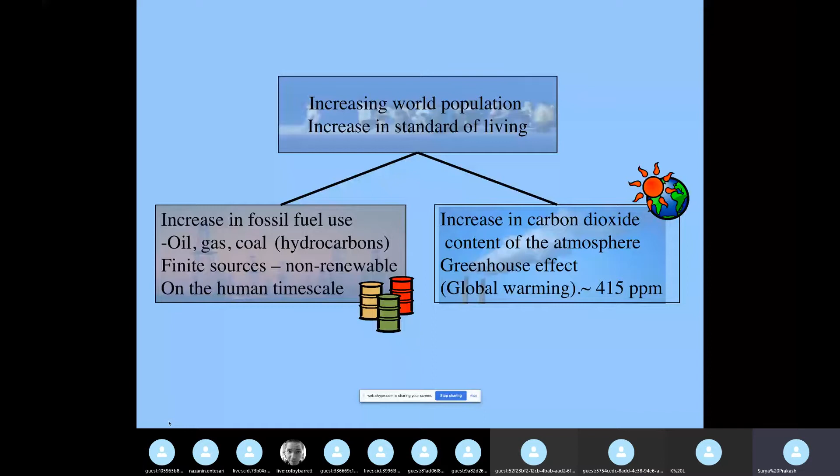Now, if you go back in world history, in the 17th century, the world population was around 545 million, but it kept on increasing. In 2000, we surpassed 6.2 billion. And in 2011, we surpassed 7 billion. By 2050, the projection is the population of the world will be, if you talk to an optimist, maybe 8 to 9 billion. A pessimist will say 11 billion.

Are you still able to hear me?

Yes. Okay, good. One of the things that the populations of the world are doing is using energy to do all kinds of stuff.

So if you compute all the energy used by humankind at any one time—transportation, your TV on, computer on, power plants running, homes heated, air conditioned—we are currently using 180 petawatt hours, or 18 terawatts continuously. That is equivalent to 18,000 power plants operating at 1 gigawatt. This is the kind of energy humankind is using continuously.

If you compute all the energy being used all over the world, this is supposed to go up by 21 terawatts by 2025, and 30 terawatts by 2050.

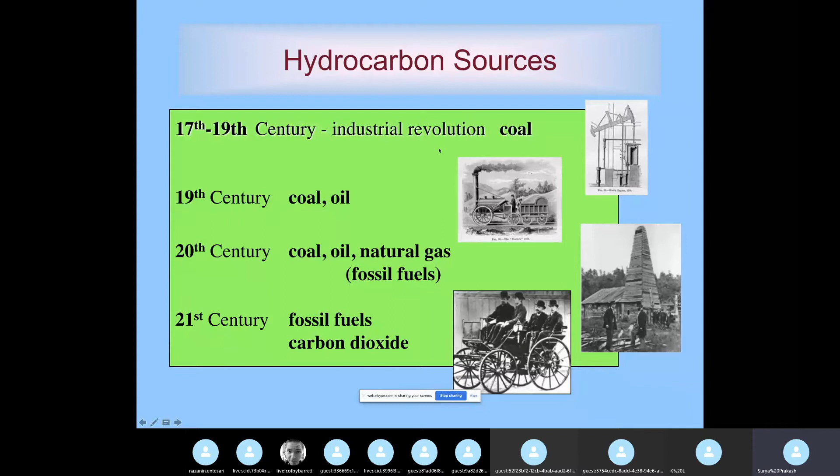Carbon dioxide is a molecule which contains carbon, and as a chemist, we can play with this molecule. In fact, this is a very important molecule in the survival of mankind as we know it, as you will see in my lecture.

Now, petroleum oil and other fossil fuels are used not only for transportation—to make gasoline, diesel, and things like that—but also to make so-called petrochemical products, chemical feedstocks. For example, you make plastics, agrochemicals, and fertilizers. All these things are done through petroleum oil, about 8 to 9% of it is used to make these other products. This is very important for us—without it, I think modern humans cannot survive.

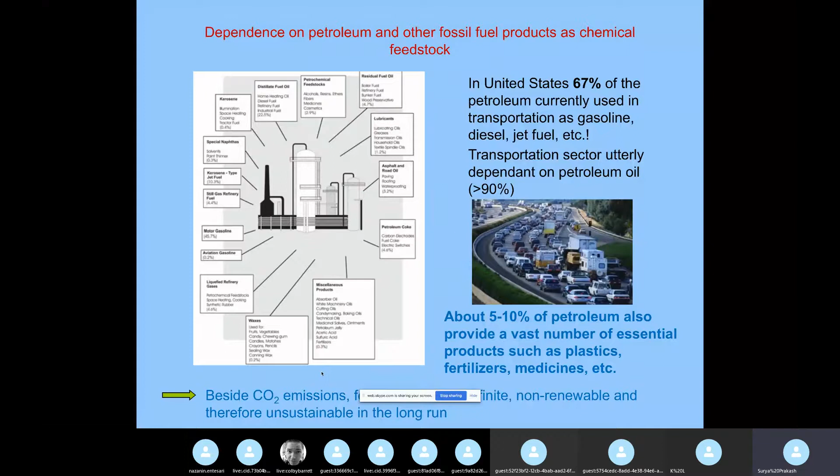So besides CO2 emissions, fossil fuels gave us unprecedented prosperity for humankind—that's what I would like to emphasize. Now, what has happened is that by burning all these fossil fuels over the years, every year we are using more and more of them, creating more and more human-caused CO2 emissions.

People have computed this using computer models. In 2013, we released about 35 billion tons of excess carbon dioxide into the atmosphere—this is all anthropogenic, human-caused CO2 emissions. By 2017, it was around 40 billion tons. So it's increasing, and about half of the CO2 emissions accumulate in the atmosphere.

And CO2 in the atmosphere—what it does is, can you hear me? Hello? Yes, okay good, yes Professor Prakash.

The CO2 in the atmosphere can absorb certain wavelengths of the sun's radiation, and then the heat is radiated back to Earth. So it causes global warming, and global warming has increased glacier ice melting, sea level rising, and climate change.

I think, let me hide this. Yeah, oh, what happened here? You can still see me, right?

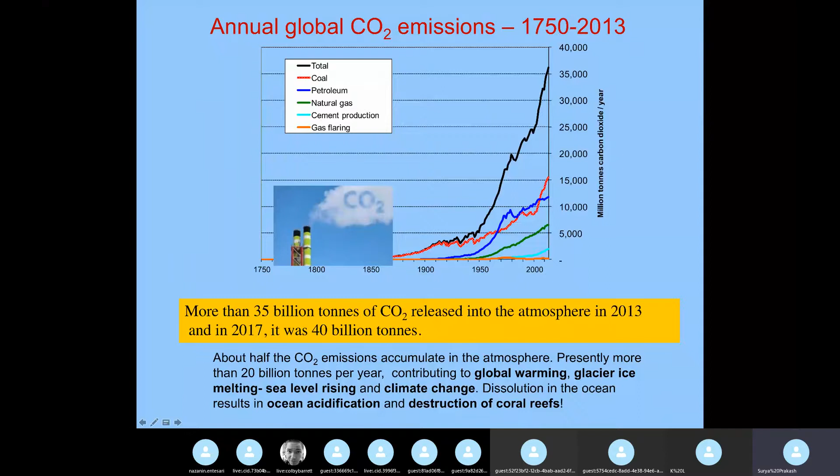Now the carbon dioxide conundrum, as I call it in the slide, has also resulted in global temperature change. You can see many things here. For example, the blue line is the temperature changes, and this solid line is the CO2 concentration,

which is measured on the Hawaiian island Mauna Loa, close to that volcano. CO2 concentration is also given here. You can see how the CO2 level is rising, and global average temperature has gone from 1.2 to 1.5 degrees.

It's a pretty big change from the pre-industrial age. Currently, in August, this is measured on a daily basis. You can see this on Google.

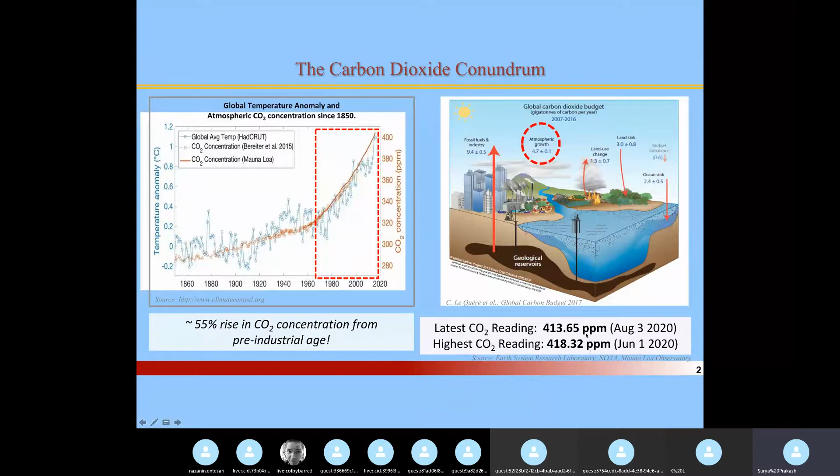August 3rd, the reading was 413 ppm. In June, it was 418. It hovers around 415 parts per million, and it is slowly creeping up.

Now, there are a lot of other greenhouse gas emissions happening. Carbon dioxide is the major culprit, about 76% contribution to global warming. Methane, which is natural gas, is 23 times more global warming than carbon dioxide.

Methane emissions come not only from agriculture and animals, but also methane leakage and so on, about 16%. Nitrogen oxides, which come out of automobile emissions and heat engine emissions, are about 6%.

These are also pretty bad. Fluorinated gases, which are used as refrigerants, are also highly greenhouse warming. But if you look at it, CO2 is our major problem.

Electricity and heat production is 25%. This is how buildings, for example heating and cooling of the building, also contribute.

And we humans, as individuals, also emit CO2. In fact, we exhale CO2. Whatever carbon-based food we eat is eventually converted at a cellular level into CO2.

And CO2 comes out, and you exhale it. An average human being, an American I could say, over a 24-hour period exhales almost 1 kilogram of CO2. This is something to ponder for you guys.

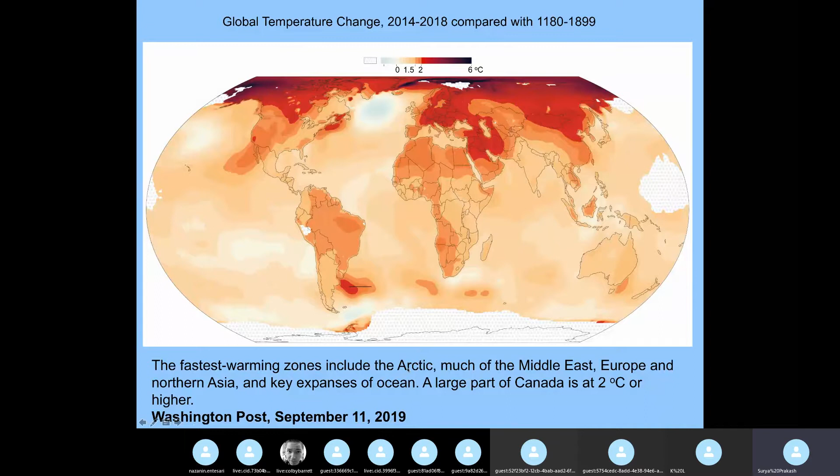Now, what is the solution for this global warming? Engineers and scientists said, okay, if CO2 is produced at a point source, for example a coal burning power plant, the flue gases will have 10 to 12% CO2 in it,

why don't we separate the CO2, capture it, and put it underground in depleted oil fields, deep aquifers, deep oceans, depleted natural gas fields, and things like that. But this is a very expensive proposition.

First of all, you need to separate it using a sequestration facility. Then you have to inject it through various technologies. So this is a very expensive proposition, and carbon capture sequestration is a pretty difficult process to achieve economically.

So what is the alternative? Now, carbon dioxide, as a chemist, is carbon and 2 oxygen. It's a symmetrical molecule, it has no dipole. But CO2 is a feedstock, you can do many things with it. For example, CO2 can be converted to polymers like polycarbonates and polyurethanes.

CO2 is already converted with ammonia to make urea. It's a major fertilizer; without urea there wouldn't be food production in the world. So CO2 contributes—CO2 with ammonia makes urea.

150 to 200 million tons are made. It's used in the food industry—you make carbonated beverages, Coca-Cola and Sprite and things like that.

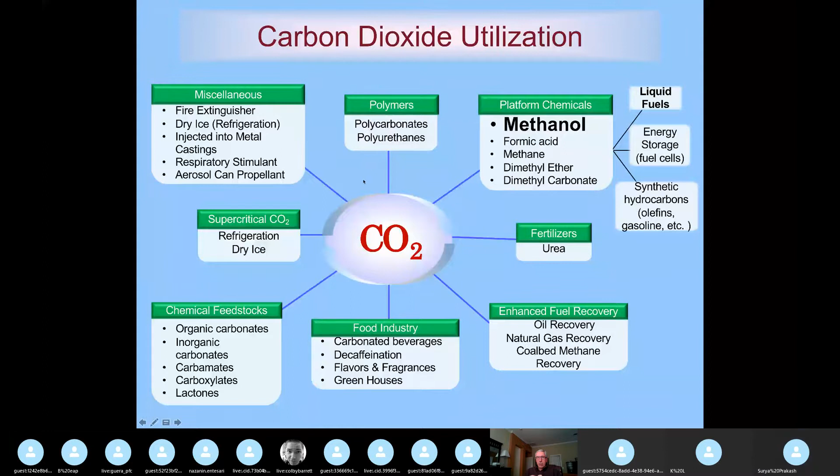Now, just to give you some numbers, ladies and gentlemen, if you look at the daily usage of fossil fuels, the world is currently using close to 100 million barrels of oil a day. A barrel is 42 gallons or 160 liters. And 10 billion cubic meters of natural gas, this is going up every year. And 16 million tons of coal was burnt about 2 years ago, it's a little bit decreasing right now. So all this activity is resulting in CO2 release, and the greenhouse effect is becoming severe.

Now, we all talked about biofuels. For example, nature uses carbon dioxide through photosynthesis to make all the flora and fauna, forests, and things like that. And if you use forest products or agricultural products like sugar or corn, you can make ethanol, which is a 2-carbon alcohol. The US converts 40% of its corn crop to make 13.9 billion gallons of ethanol a year.

That's equivalent to 330 million barrels from corn, equivalent to 225 million barrels of oil. That's mostly 2.5 days supply for the world. So 40% of American corn making ethanol is not a solution. In fact, there are people starving in the world. Corn is a food. So food security is more important to mankind than energy security.

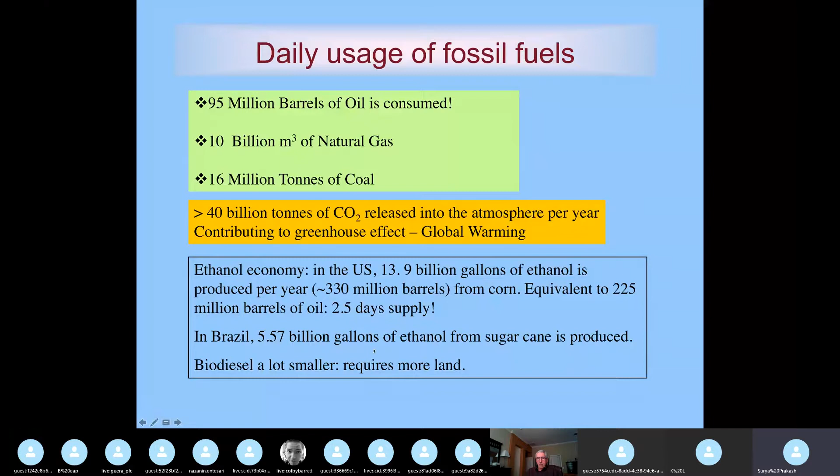Brazil converts its very dear sugar crop, sugar cane, into ethanol too. So these are all very small. It's not going to supplant fossil fuels. It can only supplement alternatives to fossil fuels.

Now biomass, nature does a wonderful job. It takes carbon dioxide and water with a green dye called chlorophyll. With sunlight, it is converted to sugar, celluloses, and things like that, very nicely. This is called photosynthesis, and you can make biofuels like ethanol, butanol, vegetable oils.

But this can only be a small percent of the energy mix, because to practice photosynthesis, we need to worry about land mass, land availability, and use. We need a lot of water to grow crops. Irrigation becomes an issue. Then we need to feed a growing population. How can you divert food into energy materials? It's not a good idea either.

And of course, to grow food crops you need fertilizers. And fertilizers come from ammonia, which is made from fossil fuels. This hydrogen comes from methane reforming and things like that. I'll come back to this in a minute. So processing technologies, energy use, overall energy balance, life cycle analysis—you need to worry about all that when working with biofuels.

And also the efficiency of photosynthesis is pretty bad. To convert water, sunlight, and carbon dioxide in a rice plant, which takes probably 4 or 5 months to grow, the overall efficiency is less than 1%. So nature is very specific, but nature is not very efficient.

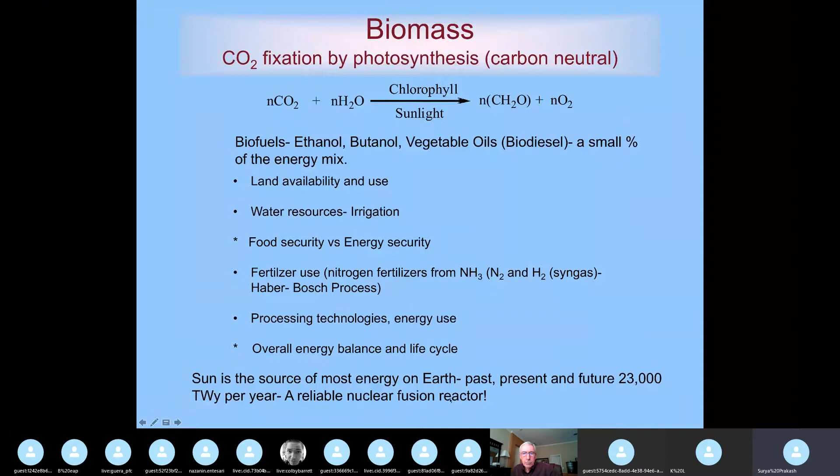But we don't have to worry about this, because the sun is the source of most energy on earth, past, present, and future. It is putting out 23,000 terawatt-years per year of energy, a reliable nuclear fusion reactor, which comes up every morning and goes down every evening, on every corner of the earth. So the solar flux is amazing. The estimate is 23,000 terawatt-years.

And mankind in 2009 used only 16 terawatt-years; now it may be 18. Look at all the other alternatives. Tides generate power too, because of gravity, about 0.3 terawatt-years per year. Geothermal is this much, hydro this much. Biomass is not that much at all, only 2 to 6 terawatt-years. And other types of technology are not very much either. But look at renewables—wind is 70 to 120.

And if you look at fossil fuels, which are finite, natural gas is 215. Sun is 23,000 per year. Okay, so it's coming every year, next 4.5 billion years. Petroleum is only 240. Uranium, which is for the nuclear energy, is 90 to 300. Coal is 900, but coal is very dirty. People are trying to get away from that.

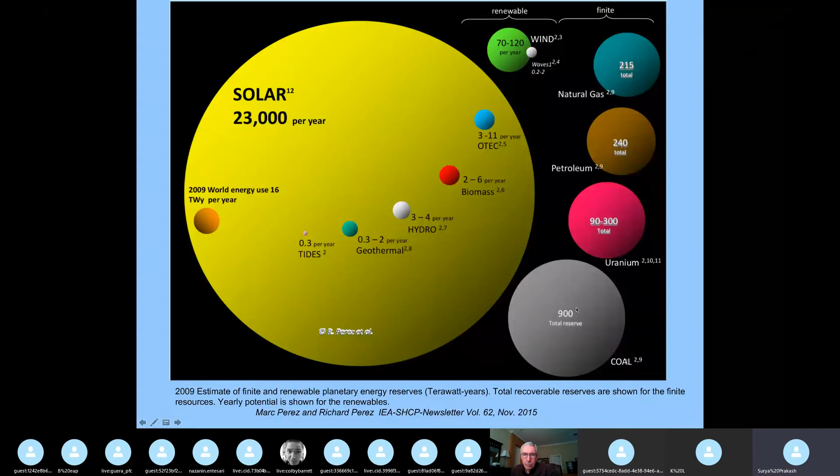So if you understand this, Earth does not have an energy problem, ladies and gentlemen. It has an energy storage and energy carrier problem. Okay. So what are the issues? Why do we have all these problems? Why not use more alternative energies and resources like hydropower, geothermal energy, wind energy, solar energy, biomass, ocean energy, or even nuclear energy, if you have the stomach for it?

The problem with all these alternative energies, mainly, is cost, although the alternative energy costs are coming down. Fossil fuels are still the biggest bargain nature ever gave us, because you just dig a hole and you can get it. In Saudi Arabia, you make a hole and you can extract oil for just a few dollars a barrel. The most promising solar and wind energies are intermittent and fluctuating. They produce mostly electricity, and battery technology has not advanced.

Whatever Elon Musk says, we still have a problem with battery technology, because to make a battery, you emit a lot of carbon dioxide. So if you look at the life cycle of making a battery and running a battery, it's not that clean if you think about it.

Okay. Now, people talked about the so-called hydrogen economy. Hydrogen is light, one of the first elements of the periodic table, right? It burns cleanly. It makes water when it combines with oxygen. But it's not a primary energy carrier on Earth because it boils very low, minus 253 degrees Celsius. It's tied up in water and fossil fuels. It has to be liberated. You need energy for that. It's incompatible with 20% oxygen in the air. It's a love affair. It can explode under certain ratios.

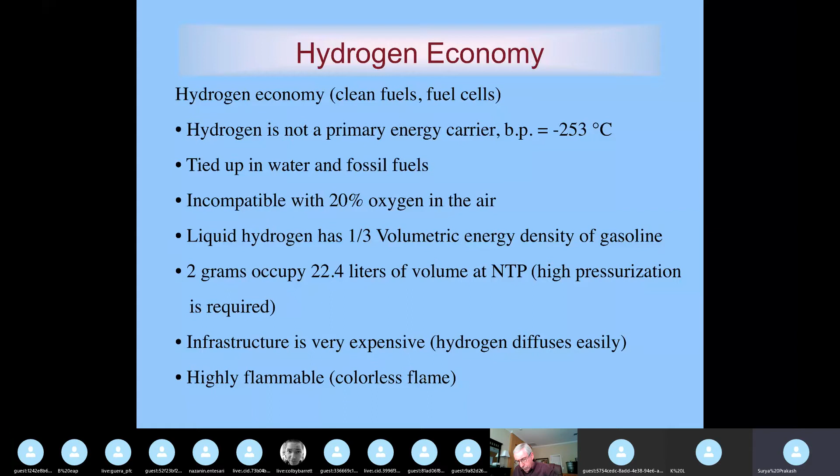Infrastructure is very expensive. It diffuses. It's a very tiny molecule. It can go through. If you have a hydrogen balloon, after some time, it's all diffused through the plastic, right? You see that. Same thing happens with helium too. It's highly flammable with a colorless flame. So hydrogen economy, although hydrogen is there everywhere, especially in the outer planets and outer space, it is not a compatible or handleable fuel for us humans, mortals on Earth. So what is the solution?

So about 25 years ago, Professor Olah and I at the Loker Hydrocarbon Institute came up with a concept called the methanol economy. So I'll tell you briefly what methanol economy is. This was done with my mentor and colleague, Professor George Olah. He passed away in 2017. In 1994, he obtained the Nobel Prize in Chemistry for superacid chemistry, to which I contributed. In fact, I accompanied him to Stockholm to receive the prize. And he's one of the major proponents of the so-called methanol economy concept.

What is methanol economy? Methanol is a simple molecule. It's a liquid alcohol, boils around 65 degrees Celsius. It was discovered by Dumas and Péligot in France. They isolated it from wood by heating wood chips. This methanol vapor comes out. It's called wood spirit or wood alcohol. And the beauty about methanol is it's a fantastic fuel for internal combustion engines. It's a high octane fuel, clean burning. It has 15.8 megajoules per liter of energy. It can be combined with 15% gasoline, and M85, 85% methanol, 15% gasoline, is a fantastic fuel for all IC engines.

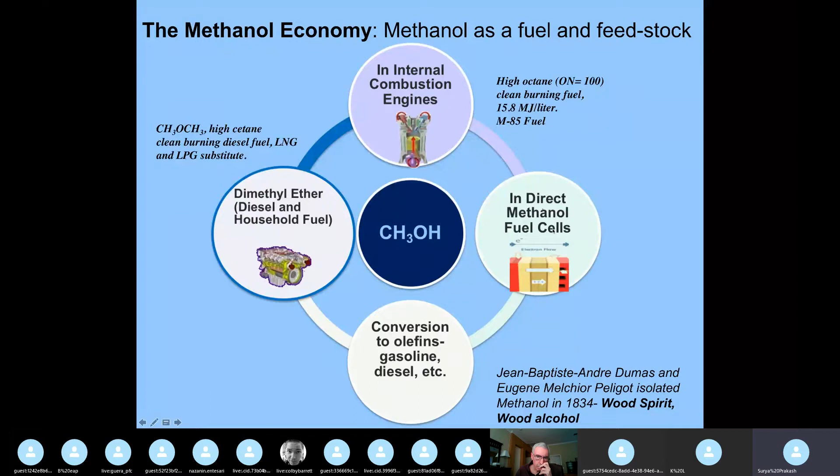Methanol can be converted to a compound called dimethyl ether. It's high cetane. That means it can replace all diesel fuels, and it's a gas replacing LNG and LPG. I'll come back to this in a minute. Methanol can also be converted to petrochemical products like olefins, gasoline, kerosene, aviation fuel, diesel, etc. And methanol could also be used to produce hydrogen on demand. It's a much higher volumetric energy density fluid than liquid hydrogen. And it can also be used in the direct methanol fuel cell that was developed in our laboratories in the 90s in collaboration with NASA JPL. So I already said it's a wood alcohol, it's a liquid, an excellent internal combustion engine and turbine fuel, high octane number.

Since 1950, it was used in race cars. And also methanol can be mixed with some gasoline. It's used in flex fuel vehicles similar to E85, which is used in California, for example, and other places in America. So methanol can easily substitute ethanol, which is derived from corn. It has half the volumetric energy content of gasoline, but is more efficient and cleaner burning. In equivalence, 15 gallons of methanol is equivalent to 10 gallons of gasoline in terms of power.

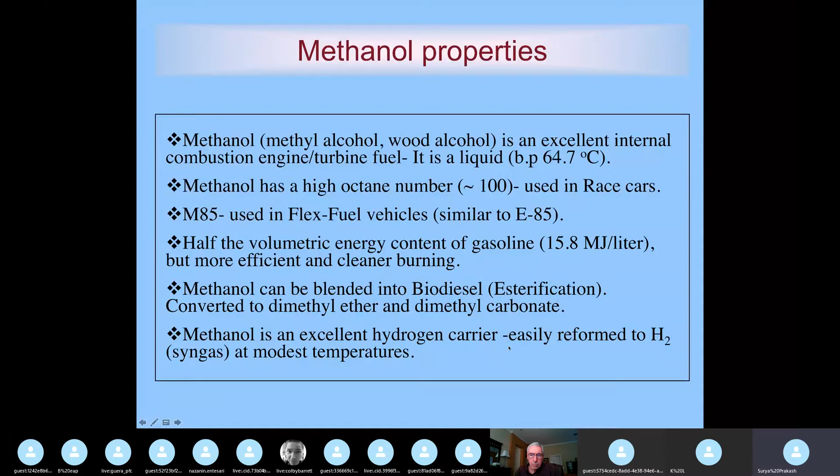Methanol can be blended into biodiesel. It's already done. Esterification, converted to dimethyl ether and dimethyl carbonate, which are also fuels in their own right. Methanol is an excellent hydrogen carrier because it is easily reformed to hydrogen at modest temperatures. Methanol is miscible in water, just corrosive for aluminum, zinc, and magnesium. But modern vehicles are compatible with methanol.

Almost all vehicles made since 1992 in America and the rest of the world are already flex fuel vehicles, so it's not a problem to have alcohol in the engine block. Only certain gaskets have to be changed. Methanol has low vapor pressure at low temperature, so you need to spike it with some gasoline. That's why they use 5% to almost 85%.

Ingestion: you can't drink methanol like ethanol. Ethanol we all enjoy sometimes, beer, wine, and things like that. But methanol can be poisonous. It can blind you. Ingestion can be lethal. But gasoline or diesel are equally toxic. How many times do you go to a gas station and ask for a pint of gasoline or diesel to drink? You shouldn't do that.

Having said that, methanol is found in beer. Methanol is found in orange juice in small amounts. Aspartame, the sugar substitute, when it reacts with stomach acid, makes quite a bit of methanol. Small amounts of methanol are not toxic, but anything above 20 milliliters can be a problem. So you have to be careful. Spillage is very safe to the environment. It's a plant growth promoter. It's already used in wastewater treatment plants for denitrification of water. It's a reducing agent for nitrates in water.

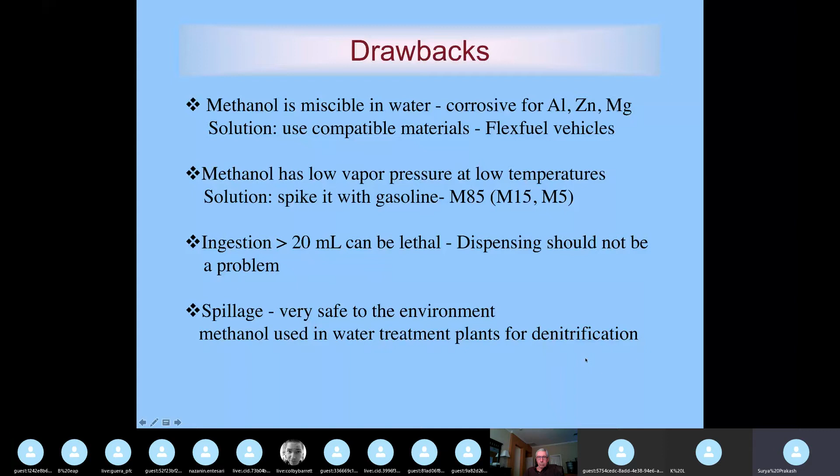So methanol in internal combustion engines has an octane number of 100. So the air fuel mixture can be compressed to a smaller volume, resulting in a higher compression ratio. I know there are some aerospace engineers, they understand this very well. Methanol also has higher flame speed, which gives you higher efficiency. And more importantly, methanol has high latent heat of vaporization. It's 3.7 times higher than gasoline. So it absorbs heat better and removes heat from the engines.

It can be blended with gasoline in various ratios. It can also be blended as methanol, ethanol, and gasoline, called GEM fuels. And Lotus, the race car company, has demonstrated that. And since methanol has high latent heat of vaporization, methanol burns cleaner. Very little NOx is produced with methanol engines. NOx is also a greenhouse warming toxic gas. Since methanol is a one carbon alcohol, you don't get any 2.5 micron particulate matter. One of the biggest pollutants from automobile emissions is NOx and particulate matter.

So no particulate matter. And also methanol is safer than gasoline in fires because you can extinguish methanol fires with water. With gasoline fires, you need foam. Methanol can be dispensed like a liquid, so we already have the infrastructure to dispense it. It's compatible with hybrid fuel electric systems. And China is one of the biggest adopters of the methanol economy. In fact, many taxis in China run on methanol, buses run on methanol, and there are dispensing stations in China.

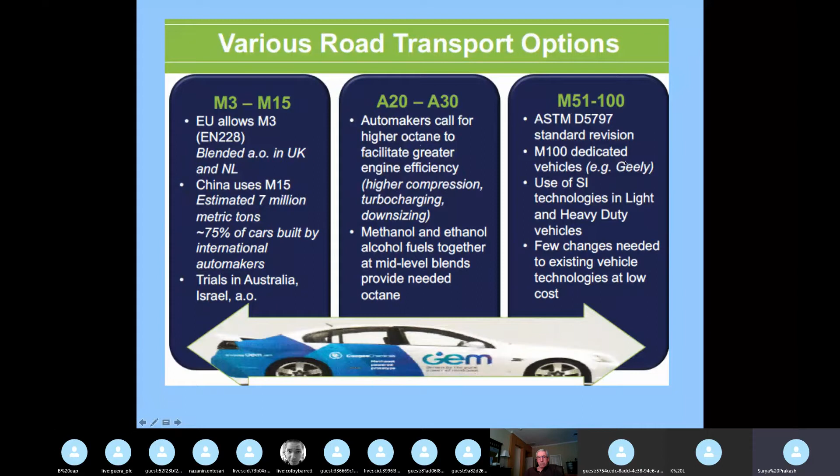There are various road transport options. For example, M3 to M15, 3% to 15% methanol blends, is done in the UK, China, Australia. 20 to 30% was done initially in China with different alcohols to boost the octane rating. But 51 to 100% is done mostly in China. China is big in this. And there's a car company called Geely, the owners of Volvo. They have shown that in China currently about 180,000 vehicles, this is old data, are running on 100% methanol, mostly taxis.

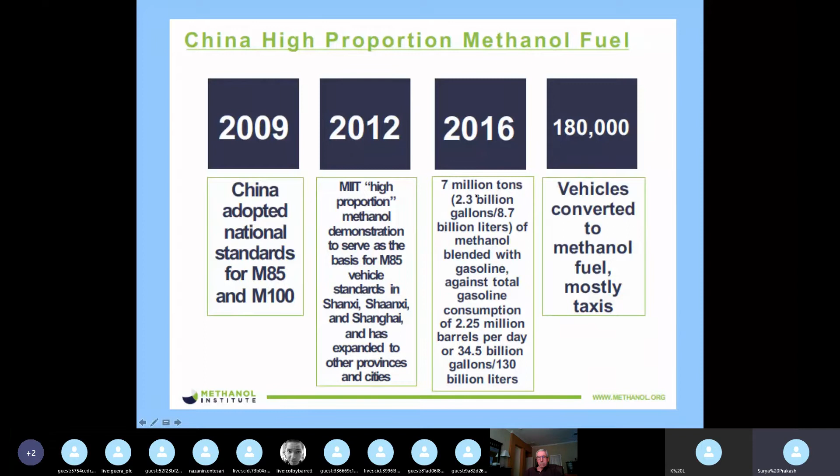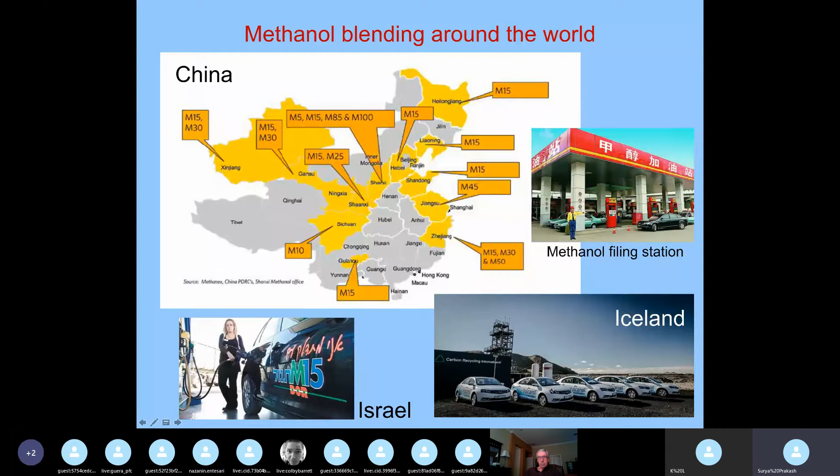In 2016, 7 million tons of methanol was used, either as such or blended with gasoline. These are the provinces in China where methanol is being used, Shanxi, where there is a lot of coal, they make methanol. Even M100 vehicles are running. I know Shanghai also has a lot of M100 vehicles. Israel has adopted some aspects of the methanol economy because they found natural gas; they can make methanol out of natural gas. Iceland makes renewable methanol. I'll come back to this a little bit later. Now, this is a Volvo-like car in China, Geely, which is a 100% methanol car.

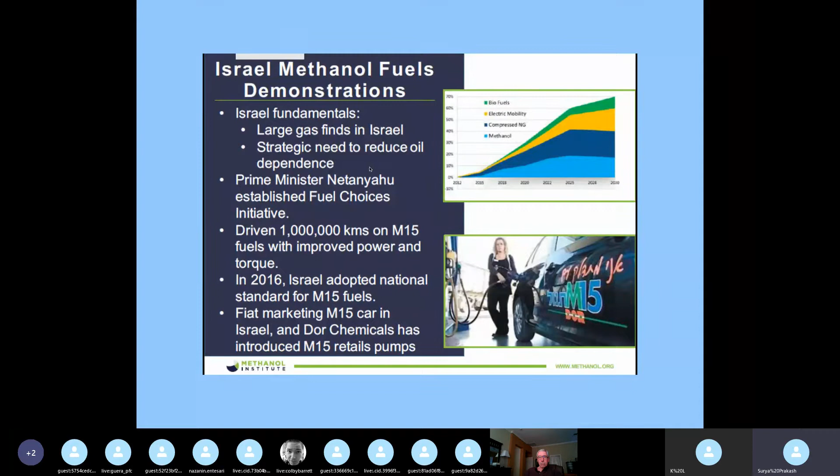Okay, and Israel has done a lot of demonstrations in this area. I was in Israel when I got my prize. It's very interesting that they have a small country. They don't have any petroleum oil, but they found some natural gas in the Mediterranean. So they're converting some of this methane into methanol.

India is another country which is interested in adopting methanol economy because they don't have much petroleum oil. They have to import it. And also we have a lot of pollution like China. So substituting gasoline with methanol, our pollution problems will go away quite a bit.

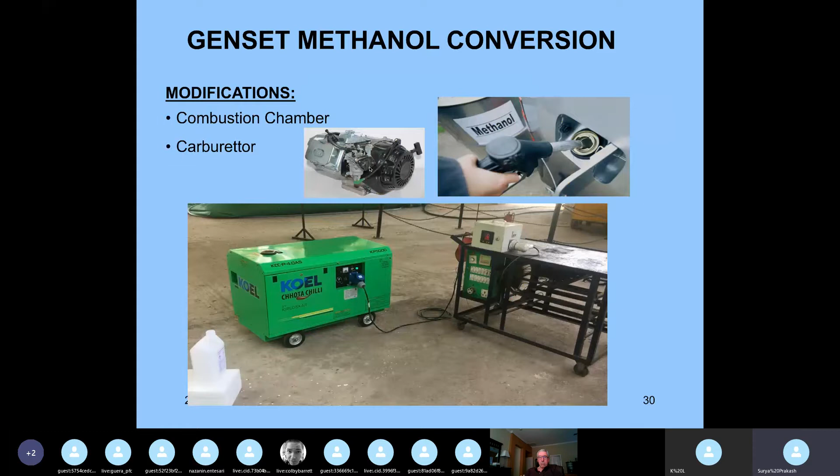And this is a genset; a diesel burning genset can be easily converted to methanol. You just need to change some gaskets. It works beautifully. And also methanol can be used in diesel-like engines. Diesel engines are called compression ignition engines. You take fuel and air mixture, compress it, and there is auto ignition. But with methanol, you need to have a spark ignition. So people have made methanol engines which resemble diesel engines.

And in fact, this super efficient spark ignition methanol engine work has been done at MIT by Daniel Cohn. He has shown that you can increase the efficiency of a diesel engine, which is 30%, all the way to 55% using methanol. Okay, so it's a very big game changer.

And in China, I know this gentleman called Chunde Yao. He has taken a conventional diesel truck. It has a diesel tank, then you put a methanol tank. You start your engine on a diesel cycle, the auto ignition cycle. Once the cycle is running, you start injecting methanol. Then automatically you can get this combustion going, so your emissions and everything improves. With a $1,000 retrofit for a diesel truck, you can make a methanol truck.

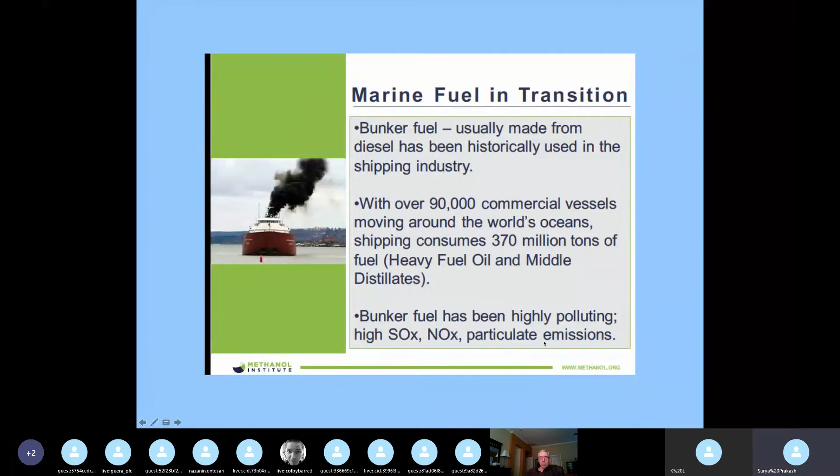Marine fuels: there are 370 million tons of fuel, heavy fuel oil and middle distillates, used, and they are very polluting. Ships use the worst fuel because they are in high seas. Nobody is monitoring them. And they produce a lot of sulfur oxides, NOx, particulate emissions. So this is a big issue. Especially in the Baltic area, there is a lot of shipping activity between the Scandinavian countries and the European countries. And they made a rule recently, called the Emission Control Area, where they monitor all these pollutants.

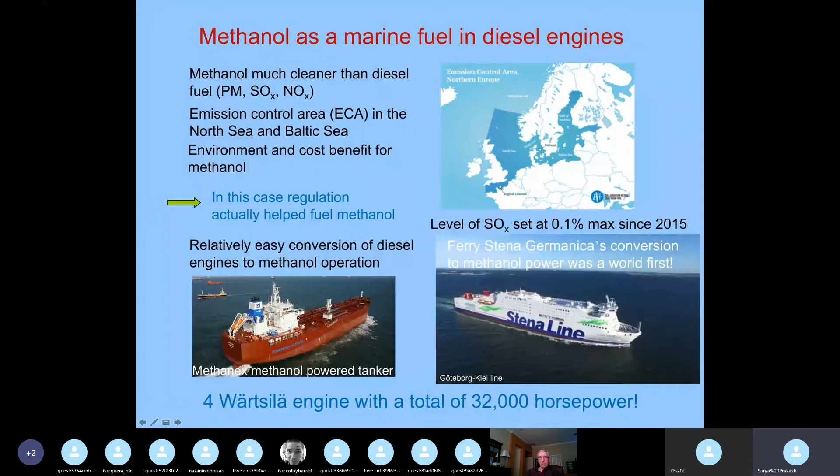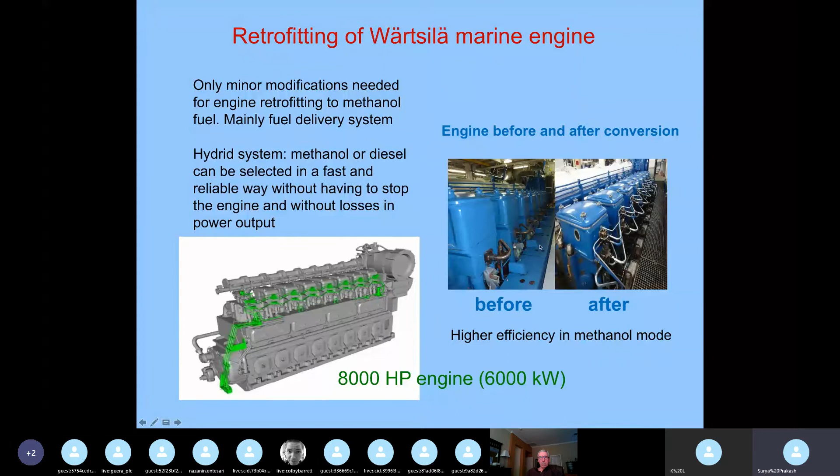So the second largest shipping company in Sweden decided to convert their huge ships to burn methanol instead of diesel. Existing diesel engines were converted to methanol engines by retrofitting. So this can be done. And even Methanex, a big methanol trading company, has some of their ships running on methanol right now. Before and after, they just had to add some injectors and things like that. You can convert them to methanol engines, and they're much cleaner burning than conventional diesel.

Methanol can also be dehydrated to dimethyl ether. It's a gas boiling at minus 24.8 degrees. It's almost like liquefied petroleum gas, like propane. Low melting point. It's an excellent diesel fuel substitute with a cetane number of 55 to 60. Regular diesel is 45 to 55. Very clean burning, extremely low NOx, SOx, and PM. There is no sulfur here, no SOx.

It's already used in spray dispensers. It's non-toxic, safe, and does not form peroxides. It's very interesting. It's a substitute for LNG and LPG. You can cook with it. Easy to produce, ship, and dispense. It also does not form any soot.

Can you hear me? Hello? Yes, Prof. Prakash, we can. Yes, okay, you can hear.

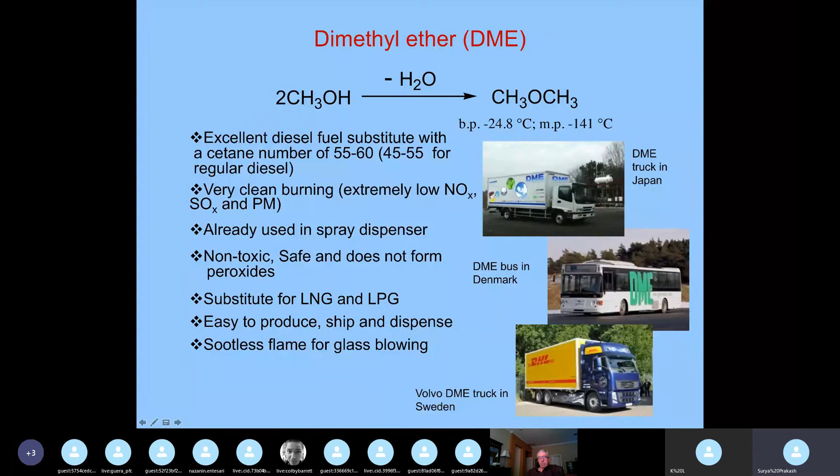Okay. And also it is used in sootless flame for glass blowing. And DME trucks are operating in Japan and Denmark. Volvo is one of the big operators of DME technologies in the world.

Now, methanol could also be used to produce hydrogen to run a hydrogen fuel cell. You all know about fuel cells, the hydrogen-oxygen fuel cell, very clean. It's basically a proton exchange membrane type fuel cell where hydrogen is oxidized at the anode and oxygen is reduced at the cathode. So you produce water, and the chemical energy is directly converted to electrical energy through two redox processes. H2 is oxidized to protons and electrons at a certain potential.

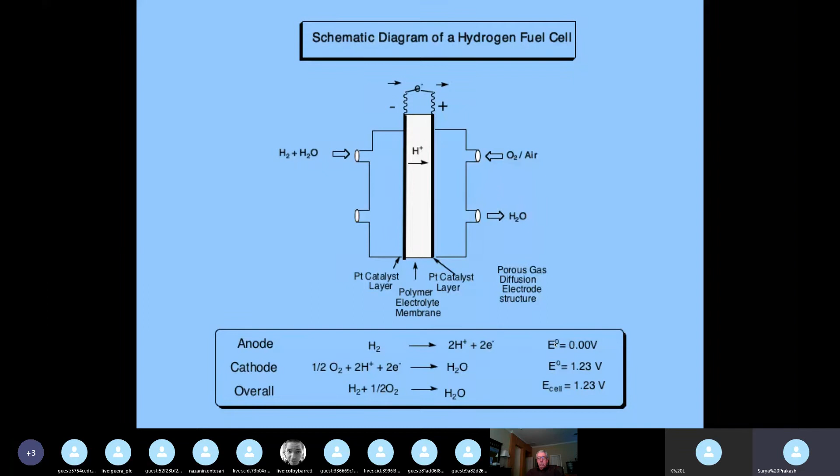At the cathode, oxygen is reduced with protons and electrons to water at this potential. If everything works, you connect a wire, you get 1.23 volt DC. And depending upon how much hydrogen, you get different current density. In fact, you can get 1 volt at 1 watt per square centimeter kind of a situation. You can do that, okay? So this has already been achieved, especially Toyota Mirai and all have that kind of capability.

So you can use methanol and water and reform it to hydrogen, and hydrogen can be fed to your fuel cell. In fact, people have looked at it. And so you don't have to carry high pressure cryogenic hydrogen in your vehicle. So methanol is a nice liquid. It is twice the energy density of liquid hydrogen. And in fact, you can onboard reform too.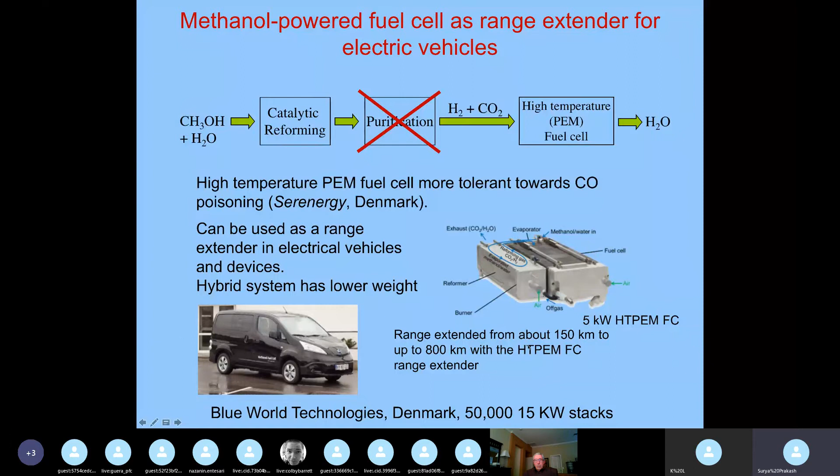There are technologies coming. You take methanol and water, catalytic reforming. In fact, these fuel cells are available with a reformer attached, 5 kilowatt type systems. And this company, Blue World Technologies, is going to make 50,000 15 kilowatt stacks, where a methanol water mixture is the fuel, and you produce hydrogen on board. A vehicle running on 150 kilometer range with a hydrogen fuel cell can now run to 800 kilometers or even 1,000 kilometers. So people are thinking so-called range extenders.

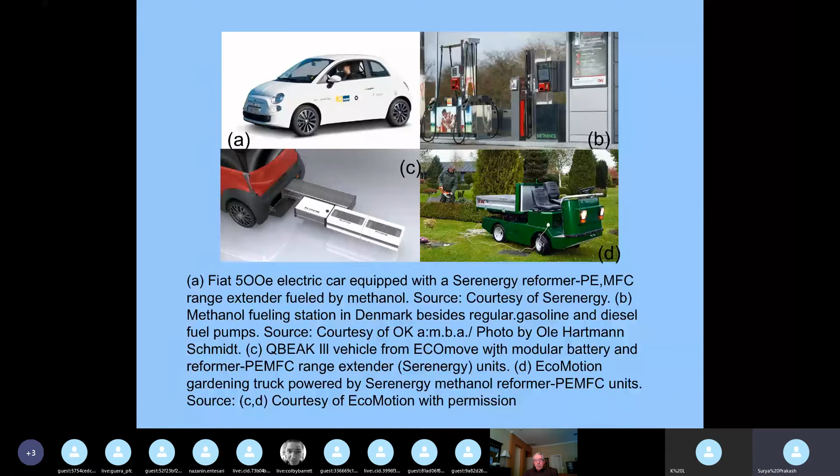And, for example, Fiat cars have been made with these kind of technologies. This type of things are also available, which is Serenergy reformer units, where EcoMotion has developed a lot of technologies in this area. Falcon Motors in China has these vehicles where basically you put methanol. It's a fuel cell vehicle, very clean. Emissions are clean, very nicely done.

Now, when you take methanol and water, this is some chemistry for you. You can reform it and get CO2 and hydrogen. This is a 12.1% hydrogen carrier. That's what methanol and water mixture is. It's amazing. In fact, a lot of chemistry has gone into this. People have studied using different heterogeneous and homogeneous catalysis. And our group has been very active in this area. And of course, when you reform with water, you produce CO2, it's a greenhouse gas.

So our group in USC developed another process. Instead of using water, we use amines to reform methanol, and we get urea and 3 moles of hydrogen. So it's a 6.6% hydrogen storage idea. DOE was looking for something better than 5%, and we already got this. And the interesting aspect is you get the hydrogen, burn it in a fuel cell, then the cyclic urea can be converted back to methanol and primary diamine using hydrogen and a catalyst. So it's a CO2-free hydrogen storage approach developed in our laboratory. This paper was published in the Journal of the American Chemical Society in 2017, which got a lot of attention from the press.

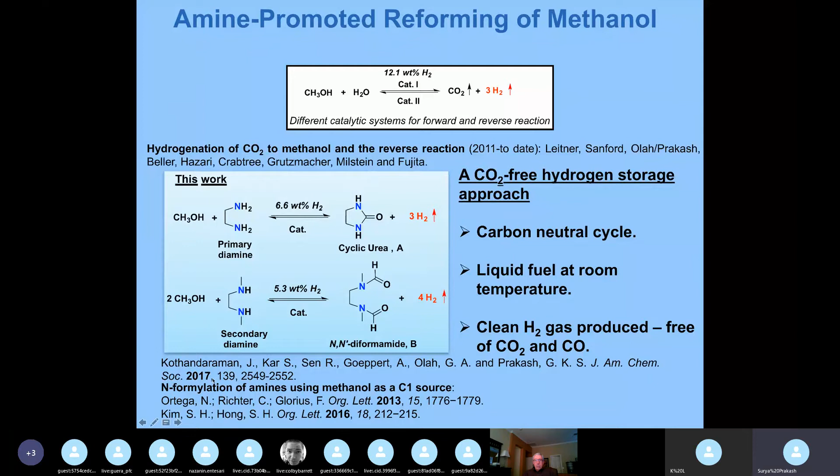Now, methanol fuel cells are very good, very easy to operate. They operate at room temperature. Maybe at the end of my talk, I'll show you a demo. The direct methanol fuel cell has advantages. It has 5 kilowatt hours per liter theoretical energy density, twice that of hydrogen. When it burns, H2O and CO2 are the only byproducts. You don't have to reform it. You can directly feed liquid methanol. It starts at low temperature. So a lot of military applications are already happening. Liquid feed of reactants means heat removal, thermal management, and polymer dry out won't happen.

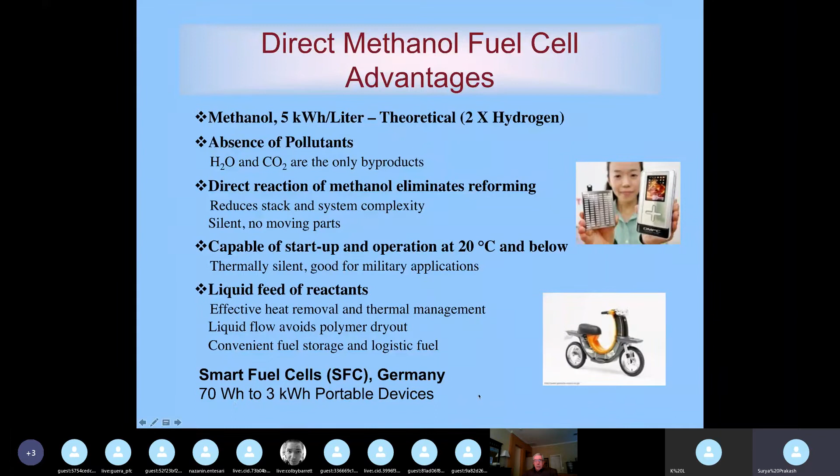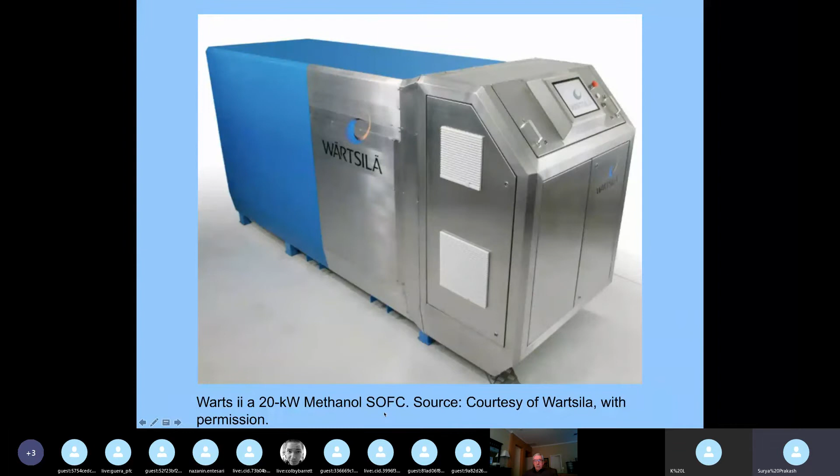And we have licensed this technology to a company called Smart Fuel Cells in Germany. They're already marketing 70 watt hours to now 3 kilowatt hours portable devices based on this technology. There are vehicles running on methanol fuel cells. Methanol can also be used in solid oxide fuel cells at high temperature, and Wärtsilä has done it in Europe. You can buy this commercially, a 20 kilowatt methanol solid oxide fuel cell. It's a device like this. You just put methanol, you get electricity.

Methanol is also used in cooking, very clean. China uses 3 million metric tons of methanol for cooking.

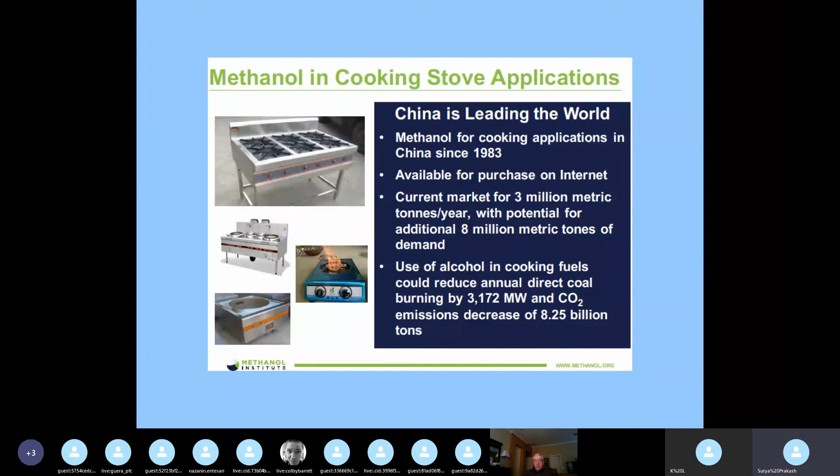With potential 8 million metric tons of demand, okay? Because it's very clean burning and it's much better than kerosene, because kerosene makes this dark smoke or soot. And in fact, this is very popular in China, especially in restaurants, to cook with methanol. And India is doing this in the state of Assam.

They already made clean cook stoves. It's made by a private non-profit organization. They're giving them, and you buy methanol in canisters. It's very clean, and the food apparently tastes much better cooked with methanol than with kerosene. Methanol is also used as a boiler fuel to make steam.

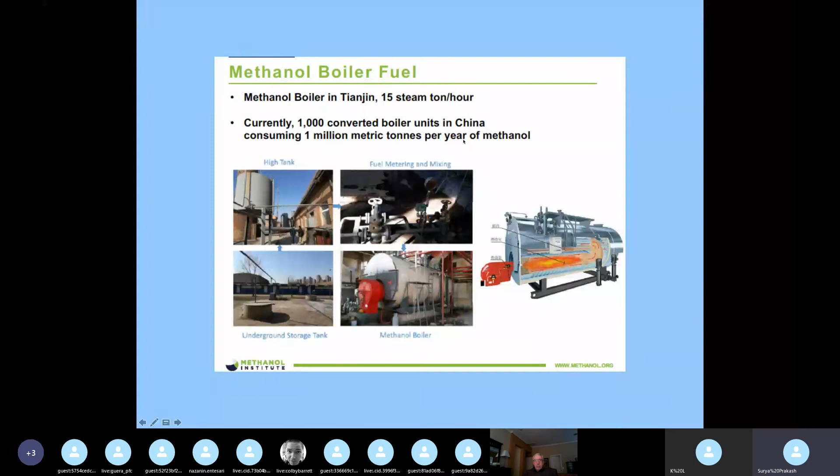In China, believe it or not, there are 1,000 boiler units in industries which are converted to methanol, because methanol is not only clean. In China, methanol is also quite cheap. It's made in large quantity. So methanol can also be used as a fuel, as I just mentioned. It is also a chemical feedstock.

You can also produce electricity in turbines. In fact, methanol also could be used as a jet fuel. I'll come back to this in a minute. If anybody's interested later, we can talk about it.

And in Israel, there's a 50 megawatt power plant which runs on methanol, which used to burn oil, in a place called Eilat. Tourists go to Eilat, so they wanted to keep the atmosphere clean, so they changed it to methanol. Cooking fuel has a lot of potential. There's a non-profit called Project Gaia, and they're giving these clean cook stoves to use methanol worldwide.

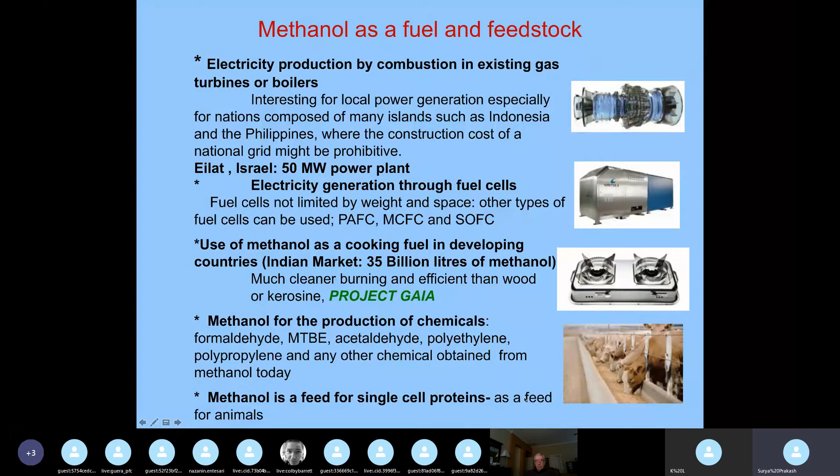Of course, methanol is used to make chemicals like formaldehyde, methyl tert-butyl ether, acetaldehyde, acetic acid, vinegar, polyethylene, polypropylene, other chemicals. Methanol also can be fed to lower level organisms like bacteria. They make single cell proteins, which are used as a feed for animals. In fact, ICI company in the UK produced 100,000 tons of animal feed using methanol as the carbon source.

So with methanol, you could do all this interesting stuff. Methanol, a one carbon solution for a one carbon problem. You can do methanol to olefins, acetic acid, gasoline. All these things are done. In 2015, 70 million tons of methanol was consumed. Today, there is about 90 to 100 million tons of methanol capacity in the world. And I'll come back to how this methanol is currently made, and we can talk about how we can make it differently.

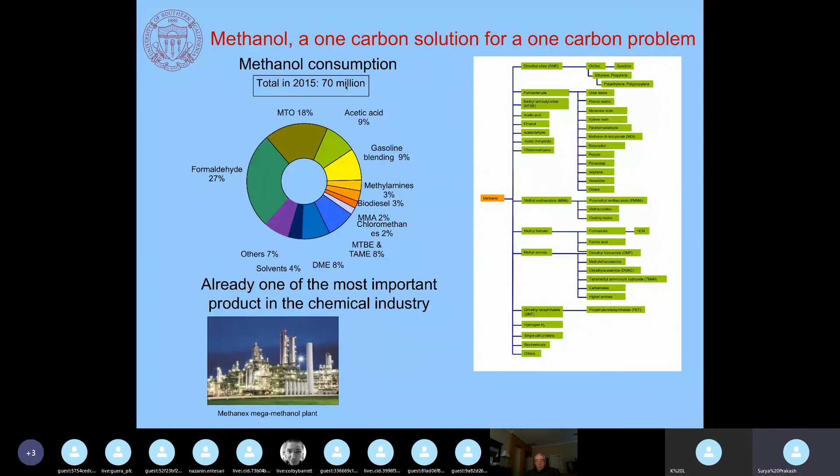Now, methanol could also be converted to ethylene and propylene, two feedstocks to make polymers. And this technology is already commercial. This is called the MTO process, which we worked on in the 1980s at the University of Southern California. Once you have ethylene and propylene, ladies and gentlemen, you can make all the products of petroleum oil, like pharmaceuticals, agrochemicals, fuels, gasoline, diesel, even kerosene, the aviation fuel, very easily through methanol as a feedstock.

China, believe it or not, is making close to 30 million tons of ethylene and propylene through methanol. China makes methanol for around $120 a ton, and it can take that methanol and convert it to ethylene. And the world price for ethylene is $1,200 a ton. Propylene is $1,400 a ton. So they're doing a lot of value addition because they don't have to import ethylene and propylene from the world market.

So where do we get this methanol? Industrially, it is produced from syngas, from coal or natural gas. I'll come back to what syngas is. You can do direct methane oxidation. You can do biomass gasification. But you can also do what's called carbon dioxide reduction: capture carbon dioxide, reduce it, and you can make methanol.

Naturally, it is made from wood. It's called wood alcohol, but you can't make much out of wood. There's not enough wood to go around. But methanol is also found in outer space in large quantity. Nobody knows the origins of it. With Thomas Mathew, who is in the audience, and with George Olah, we speculated how this methanol might have been formed in all these galactic clouds, close to nascent stars and things like that.

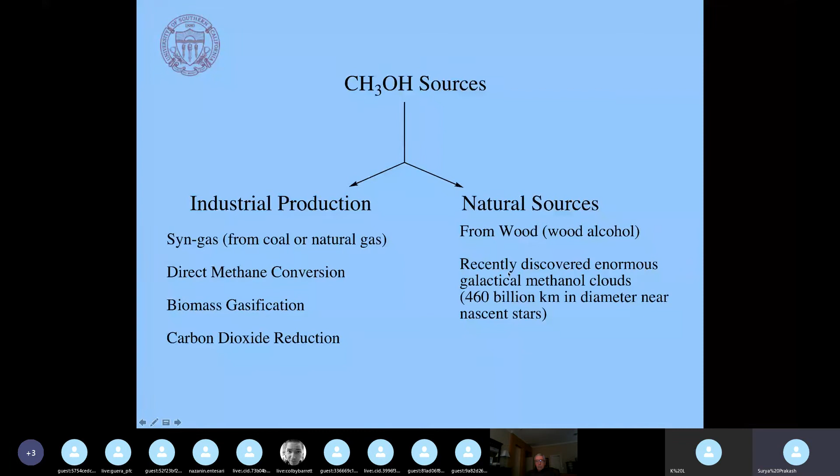In America, we found a lot of what is called shale gas. And there was a report in 2012 by Moniz, who was the DOE secretary. It's called The Future of Natural Gas, an interdisciplinary MIT study. The potential for natural gas to reduce oil dependence could be increased by conversion to room temperature liquid fuel that can be stored at atmospheric pressure. Of these fuels, methanol is the only one that has been produced for a long period at large industrial scale.

Methanol has the lowest cost and lowest greenhouse gas emissions, but requires some infrastructure modification and faces substantial acceptance challenges. This is a problem because people believe methanol is not good since it's toxic. Actually, gasoline and diesel are more toxic. You can't drink those either, and you're not supposed to drink methanol either.

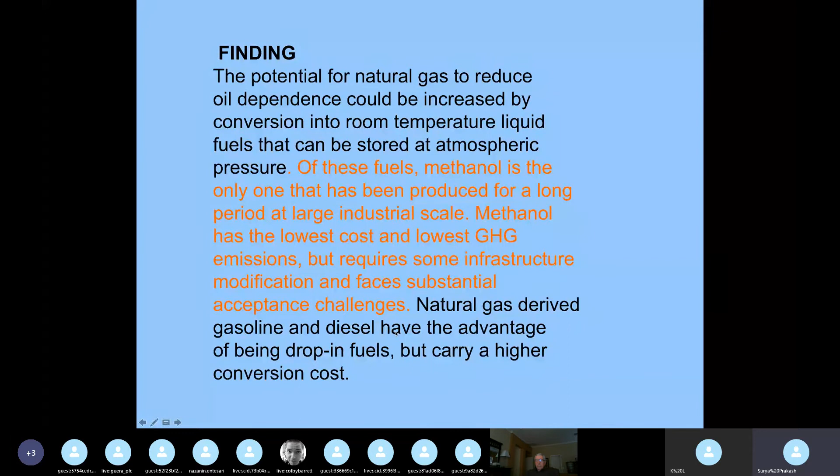Natural gas derived gasoline and diesel have an advantage in that we can convert even methanol to gasoline and diesel if you want, but it's an extra step. Methanol is made from CO and hydrogen, carbon monoxide and 2 moles of hydrogen. It's an exothermic process.

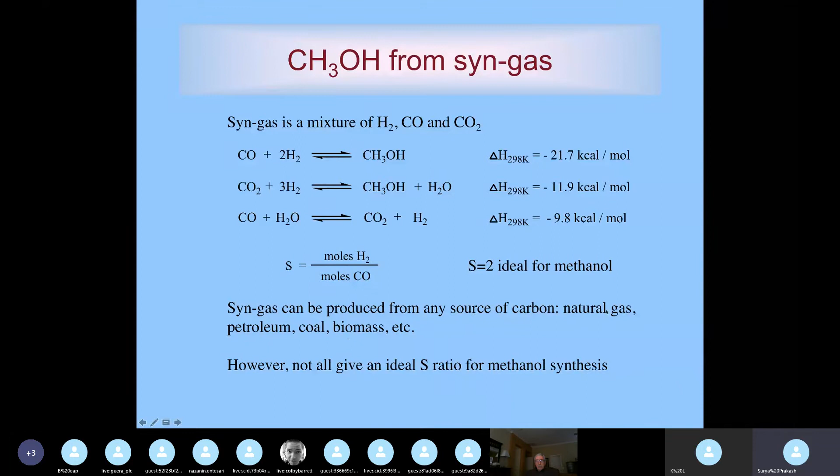You can take CO2 and 3 moles of hydrogen to make methanol and water. And carbon monoxide and water can also go to hydrogen and CO2, called a water gas shift type reaction. Syngas can be produced from any source of carbon: natural gas, petroleum, coal, biomass, CO2, etc.

Initially, the world used to take methane, natural gas, and water. At high temperature, they reformed it to CO and 3 moles of hydrogen. It's a very endothermic process. Excess hydrogen is used to make ammonia. This was practiced in a very big fashion in the 1930s.

Once you have hydrogen and CO, you can make methanol, or you can do oxidation of methane to make CO and 2H2. CO can be further oxidized, hydrogen can be oxidized. Or you can reform methane with CO2 to make 2 CO and 2 hydrogen. But you need the right ratio, CO to 2 hydrogen, to make methanol. This gives you excess hydrogen, that gives you less hydrogen.

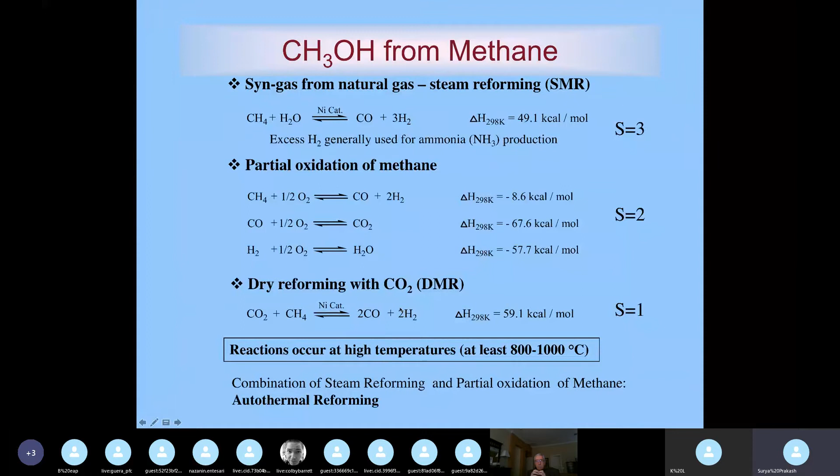So what we did was come up with an idea at my institute many years ago. We took a steam reforming equation and dry reforming equation and combined them: 2 times steam reforming, 1 time dry reforming, combining the ratios, 3 methane, 2 water, CO2, to make 4 CO and 8 H2, which gives us 4 moles of methanol, nicely balanced. We developed this as a commercial process, although nobody has licensed it yet.

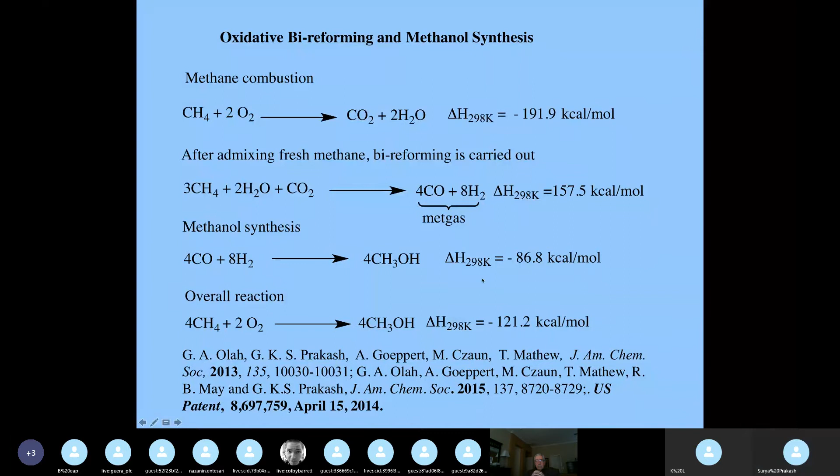We can do this to get the right ratio. We have a lot of patents in this area. Bi-reforming of methane will give you methanol very efficiently. We can also do what's called oxidative bi-reforming, where you take the exothermicity of oxidation and combine it with the endothermicity of bi-reforming, making it cost effective. So we are working on this area too.

Methanol can also be made from coal, and China and India are considering this. In fact, China makes most of its methanol, almost 55 million tons a year, through coal reforming, using water and coal, making syngas and converting it to methanol. But this has a very high CO2 footprint. The problem is methanol is a much cleaner burning fuel compared to gasoline or diesel, which is why China uses it to keep their cities clean.

Methanol can also be made from non-edible biomass. You can gasify it to syngas and make methanol. There are already processes going on, but the scale is not very high. You can use wood waste, agricultural crops, municipal waste, animal waste, aquatic plants, algae, etc.

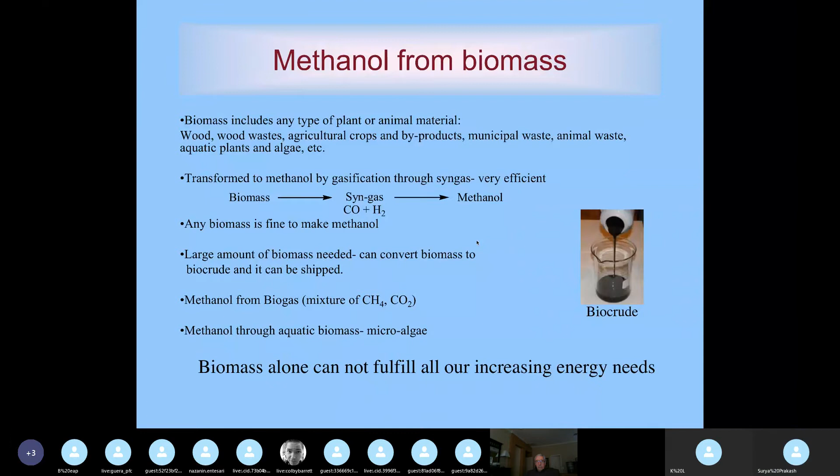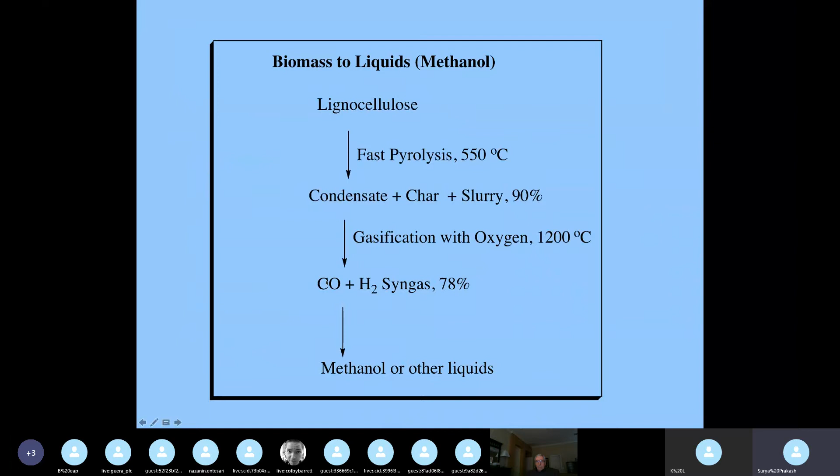You can also take biomass like lignocellulose and do pyrolysis. You get condensate and char, called black oil, which can be heated with oxygen at high temperature to get syngas, from which you can make methanol and other liquids. There was a company called Chemrec that took lignocellulose from the paper industry in Sweden, made black liquor and syngas, and made directly dimethyl ether, which Volvo used to run a lot of trucks on.

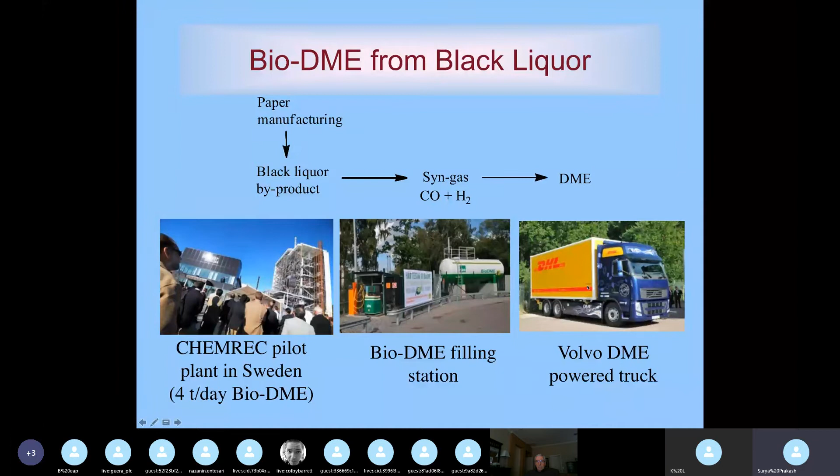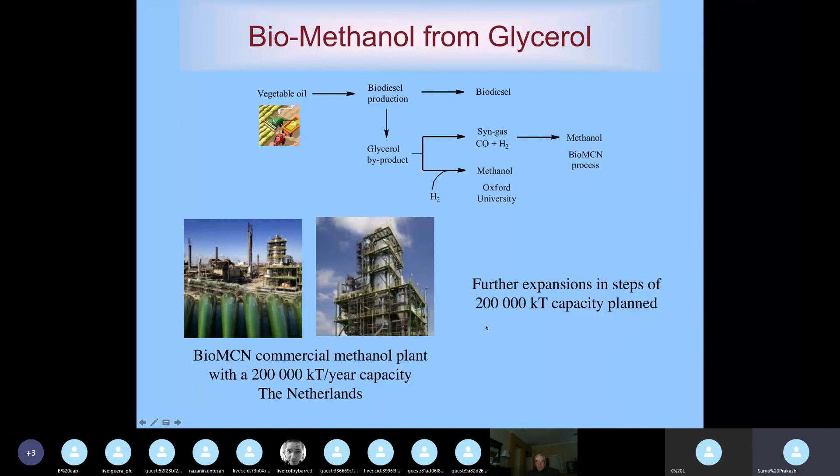Biomethanol can be made from glycerol, which comes out of the biodiesel industry. Glycerol can be gasified, and in the Netherlands they were thinking of a 200,000 kiloton capacity plant, planning to make methanol from glycerol.

We can also make methanol from carbon dioxide. Carbon dioxide is a very stable, linear molecule, difficult to work with. It's at very low concentration in the atmosphere, around 0.0415%, or 415 ppm right now. Many places release CO2: geothermal vents, fermentation processes, natural gas wells, cement plants, fossil fuel burning power plants, aluminum plants, and air itself has CO2.

You can use technologies called absorption, since CO2 is an acidic gas — chemically you can treat it with a base, or dissolve it in solvents. There are processes using solid adsorbents, cryogenics, membranes, or you can give it to algae and microbial systems so they can grow in a CO2 atmosphere.

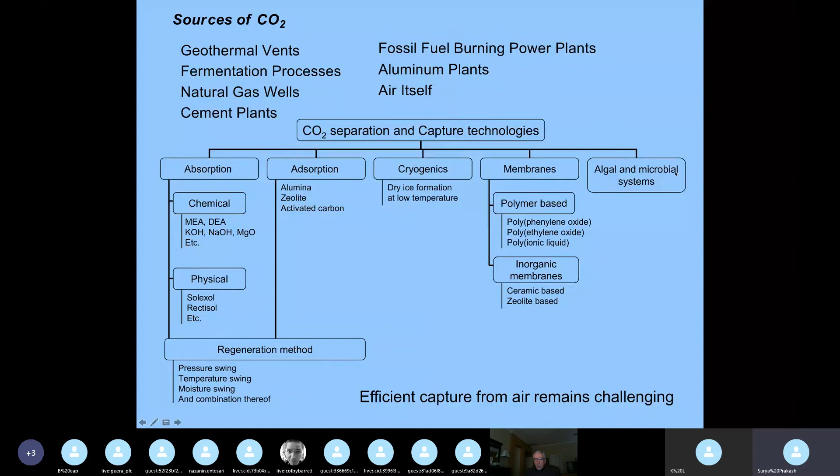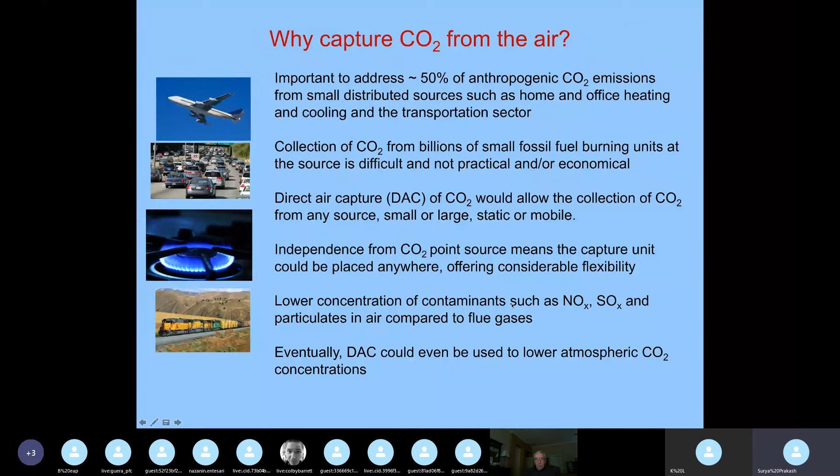But we decided early on the best way to capture CO2 will be from air, because all the CO2 that is released will eventually be equilibrated with air at this 415 ppm concentration. Collecting CO2 from a tailpipe of a car will be difficult, or an airplane, or a train, or from animals. So our whole idea is, can we develop a technology to capture CO2 out of air?

This is where we used our chemistry principles. Our institute is very active in this area. We can capture CO2 directly from air using adsorbents that were developed at USC, and we had projects supported for this kind of stuff from DOE and ARPA-E. We developed materials based on silica, and silica itself has a lot of pores in it.

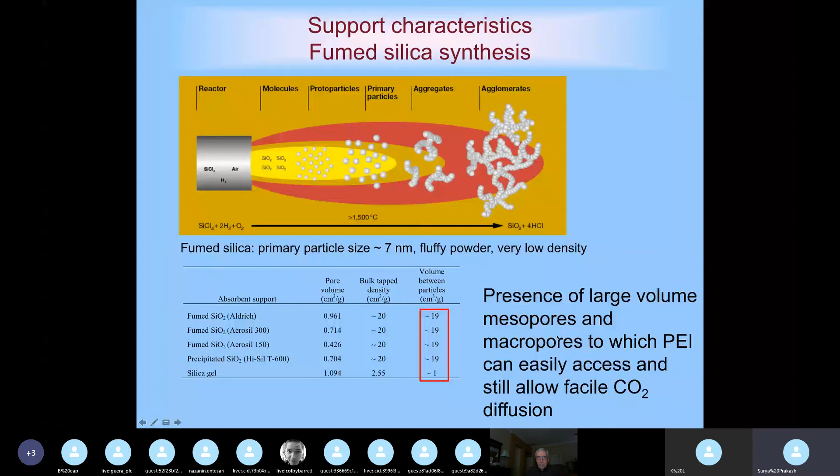We looked at fumed silica, with large volume mesopores and macropores, and decided to put some amines on it, like polyethylenimines. These are all nitrogen bases. I already said CO2 is an acid, so we said, why can't we do an acid-base type reaction using amines and capture CO2 out of air?

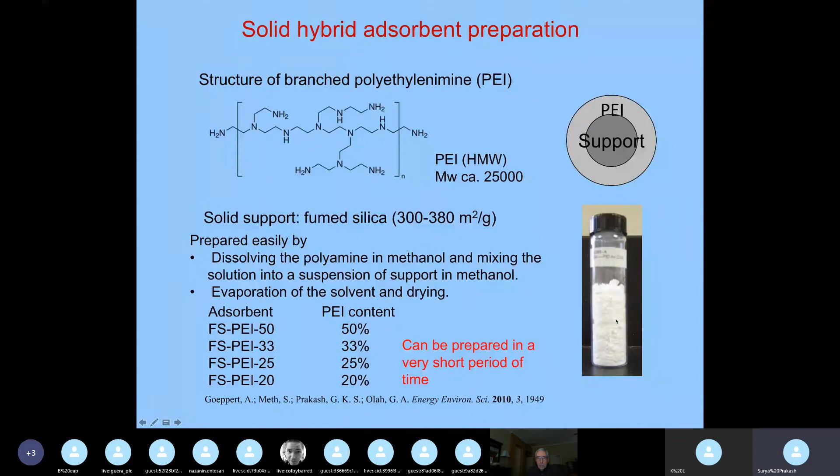So we developed this polyethylenimine supported silica. They look like free flowing powders. We have a lot of chemistry developed over the years in this area. Once we have it, the CO2 reacts with the primary amine to form the carbamate, and the carbamate is basically a negative and positive, a zwitterion.

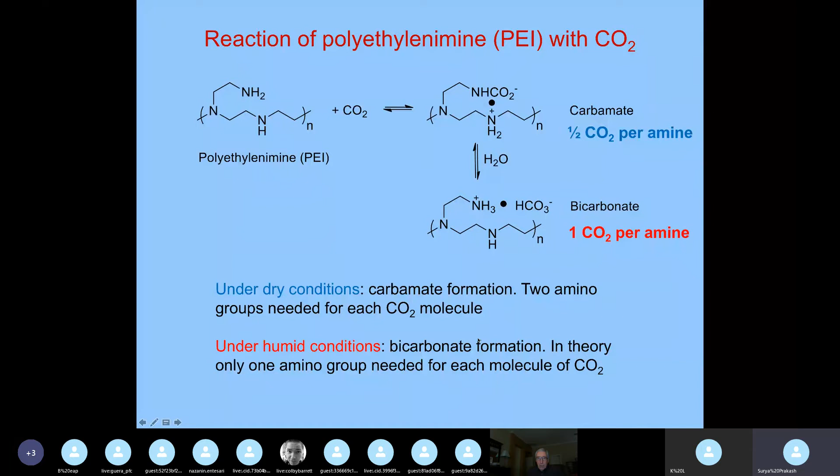That means 2 nitrogens capture 1 CO2. But if you have water around, you form ammonium carbonate, bicarbonate, 1 CO2 per amine. This is very effective, so under humid conditions, which is usually present anywhere in the world, even in Saudi Arabia's desert, the humidity is around a few percent, there's always water around. So humid capture is much more lucrative for CO2 capture.

So once we capture it, we can thermally heat it and liberate it. There are various techniques, and we have adopted a simple temperature swing desorption technique for adsorption. In fact, we developed some materials on PEI, on fumed silica, and we had our first paper in 2010.

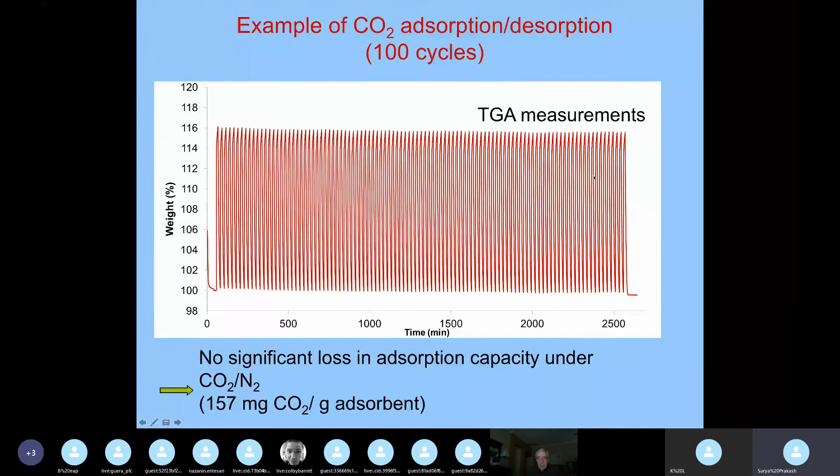I'll go a little bit faster because of the time. We can show that with this adsorption desorption, we get 157 milligrams of CO2 per gram. It's very clean, we have done hundreds of cycles using our materials for adsorption desorption.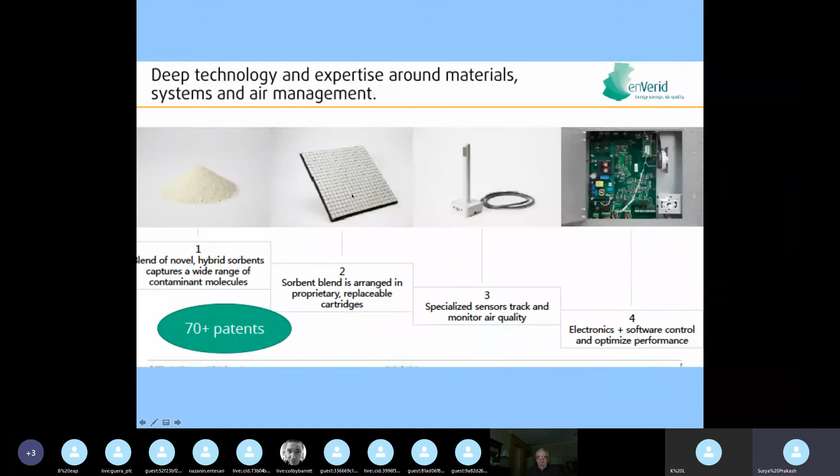In fact, this technology was licensed to a company called enVerid, and they use our material in filters like this, and these filters are put in the air handling equipment in their buildings. For example, there are 80 buildings in America and the rest of the world where our material is produced in ton quantities, and they're used to collect CO2 within the building.

See, what happens is when people start working in high-rise buildings with 8,000 or 10,000 people, everybody exhaling CO2, the CO2 level in the building goes up. That means the mental faculties come down. So they have to bring in outside air using huge air handlers, which is heating and cooling air and bringing it inside. So there's a lot of energy cost associated with air exchange from outside to inside.

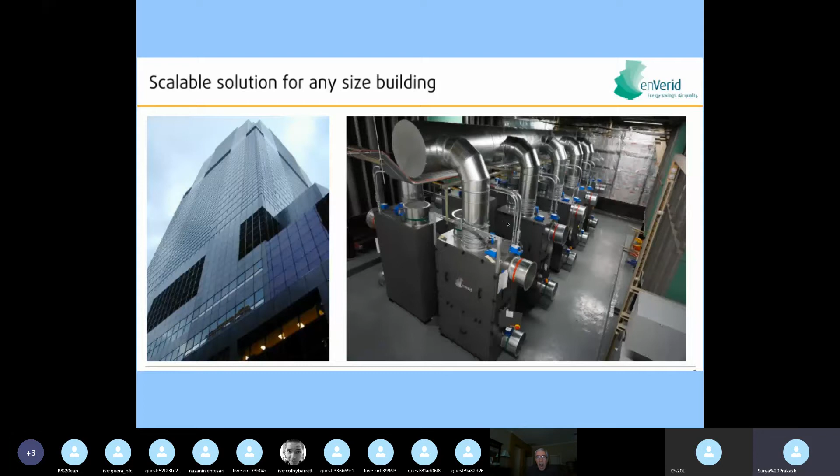With our technology, we can capture CO2 within the building. That way our air handlers could be 30% smaller, and you save 30% in energy costs. So this company has been very effective in using our chemistry to develop a commercial technology for indoor air capture.

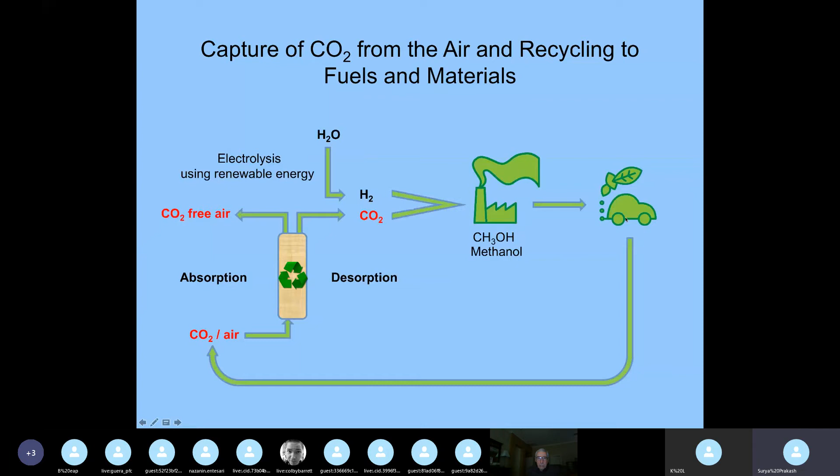Now once you capture CO2, ladies and gentlemen, you can take hydrogen and CO2 and make methanol, and methanol could be used for all kinds of purposes. So it goes back to air, from air we capture CO2 and we can make methanol. In fact, we have done a lot of work in this space, and most recently we have been working on direct air capture.

So we take air, bubble it through these polyamine solutions, then in situ we hydrogenate using different catalysts, and your amine is liberated to capture CO2 subsequently. Our first paper published in 2016 got tremendous attention in the press, 300 websites all over the world carried this story that we were able to make fuel out of thin air.

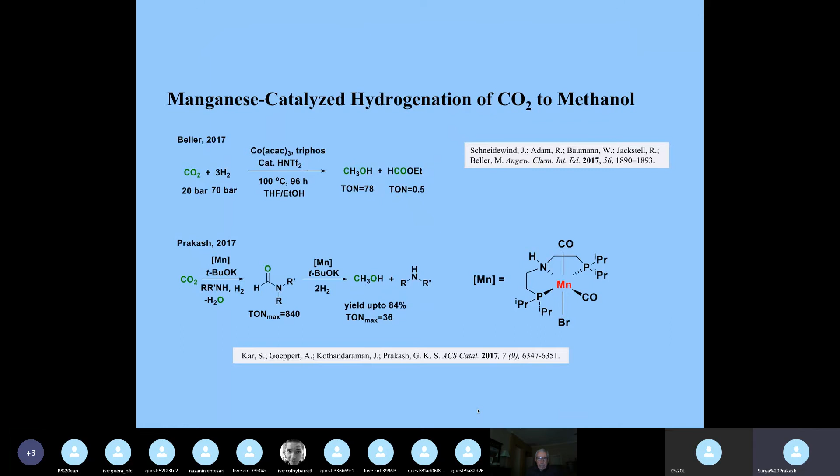That was this story. We have used less expensive catalysts based on cobalt and manganese. Beller has done cobalt, we have done manganese, and we also have done recycling catalysts in a biphasic system. We have been able to do that. These are all published, I don't want to go too much into it.

More recently in February, we showed that we can capture CO2 using alkali media, like sodium potassium hydroxide media in ethylene glycol, and we can make methanol, and then we can grab CO2 again and again. It's an integrated CO2 capture and conversion system, a carbon neutral cycle.

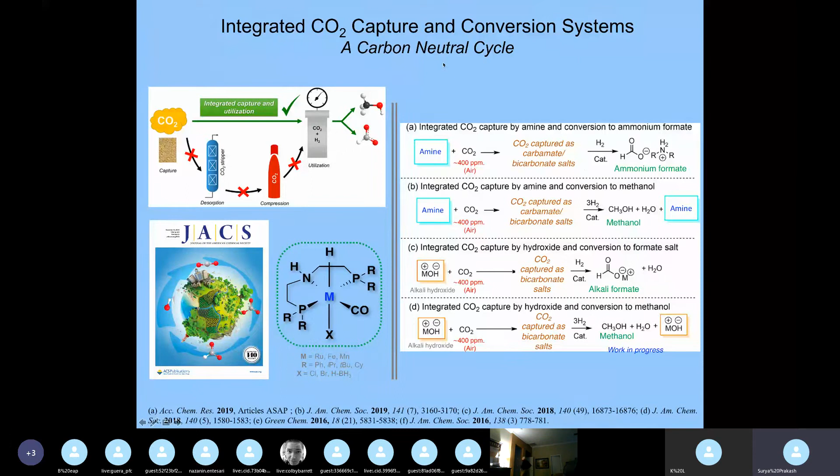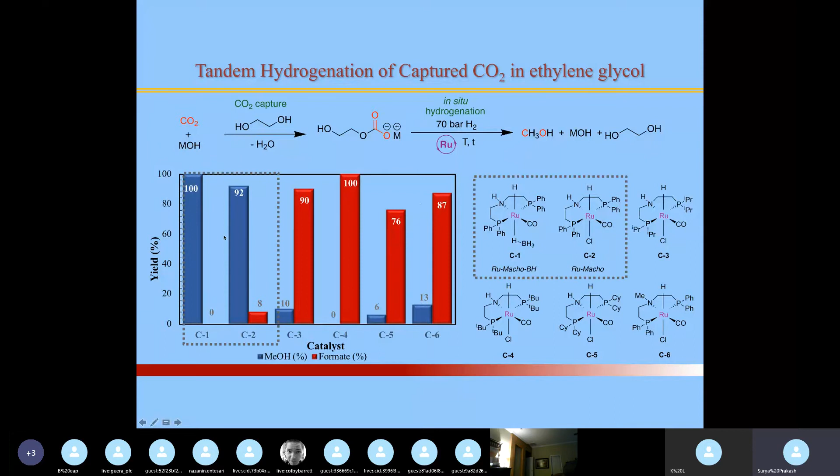And this is a tandem hydrogenation of captured CO2 in ethylene glycol. We can get 90 to 100% conversions to methanol. And we are ready for the next system.

This was published in 2020, February. The amine-free system for integrated CO2 capture and conversion to methanol has been developed. We used KOH, which is regenerated after methanol synthesis, so you can use it for subsequent capture. We have some side reactions which we are trying to avoid. This got a nice story in C&EN, Chemical and Engineering News: one-pot process converts CO2 capture from air into methanol.

Now we also have taken flue gases, which come out of a coal burning power plant, using tertiary amine capture. This paper got published a few days back, and we can do that too. So we are working in this space.

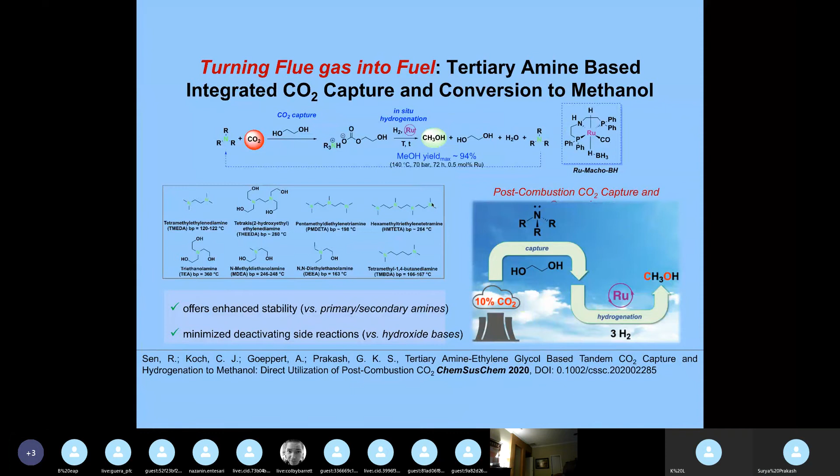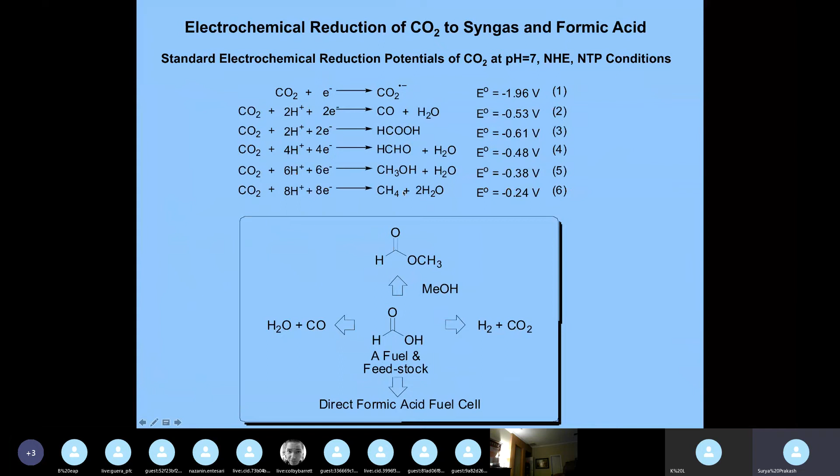Now what I haven't told you is, where do you get the hydrogen? You can electrochemically directly reduce CO2. In fact, we also work in this space. CO2 with an electron makes the radical anion. Two proton, two electron gives you carbon monoxide or formic acid. You can make formaldehyde, methanol with 6 electron reduction. 8 electron reduction gives you methane. All this has been done. People are looking into it.

So the sources of carbon dioxide, you can get from anywhere. Hydrogen and CO2, you could do this already. But electrochemically, we have shown that CO2 and water with electrons and electrode catalysts, we can make syngas to make methanol. Electricity needed for hydrogen or for the reduction can come from any renewable, wind, solar, etc. We have a patent in this space too.

Water electrolysis is a very well-known process. You can electrolyze water. The theoretical efficiency used to be 39.4 kilowatt hours per kilogram. Currently it's about 50 kilowatt hours per kilogram of hydrogen. At 4 cents a kilowatt hour, if you pay for alternative energy, it costs about $2.6 a kilo of hydrogen. The main driver for hydrogen production is the cost of electricity.

So CO2 and hydrogen can be converted to methanol. At 4 cents a kilowatt hour, you can make methanol at $1.8 per gallon. So if your solar power or wind power, sometimes wind energy, they give it away at night because they don't know what to do with it, you can make hydrogen and convert it to methanol.

In fact, we are practicing this in a plant in Iceland, in Reykjavik, where we take cheap geothermal electricity and hydroelectric power, make hydrogen, and CO2 comes out of geothermal steam, which is quite pure actually. We are making about 12 tons of methanol a day. This methanol plant was named after my late colleague George Olah: CO2 to renewable methanol plant. And if you use this methanol, which is called Vulcanol, you get 90% reduction in CO2 emissions compared to gasoline. So this is the kind of stuff as chemists we should do.

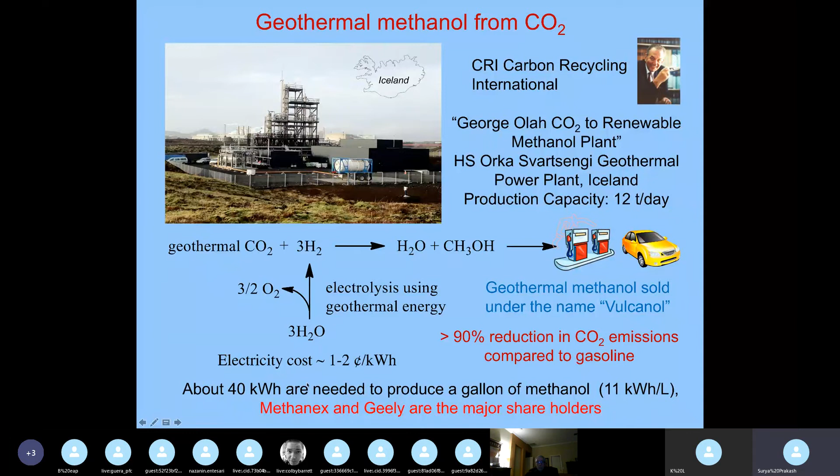See, methanol as a fuel, I don't have to change my infrastructure. I can keep the existing infrastructure, existing pipelines, existing cars will happily run. A 1968 Toyota would run happily on methanol, very cleanly. 40 kilowatt hours of electricity energy is needed to produce a gallon of methanol. So this is something you guys should take home as the message: if the electricity is 1 cent or half a cent, you can make methanol very cheaply.

So this ubiquitous methanol is a fantastic fuel and chemical feedstock. It can be made from natural gas. Currently you can do it. You can make it from coal. China does it. You can make it from biomass, biogas, and things like that. But ultimately it can be made from CO2. And of course, the methanol can be converted to dimethyl ether.

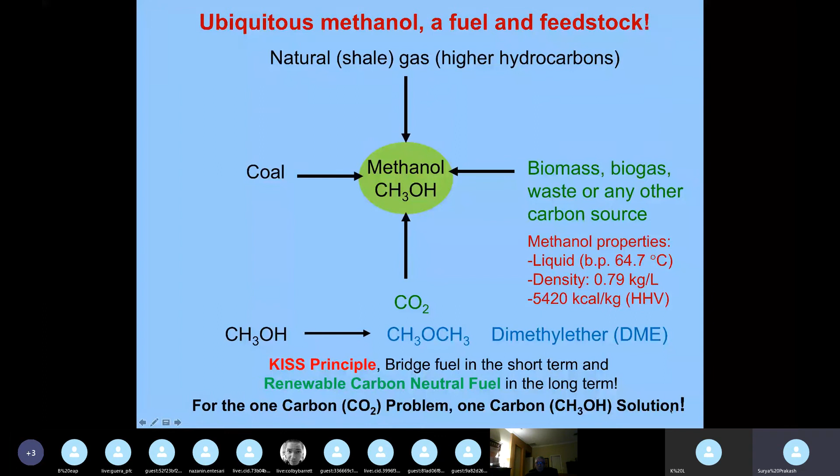So CO2 is a one carbon problem. We all talk about the greenhouse problem. And methanol could be a one carbon solution. It's called the KISS principle: keep it simple, stupid. Methanol could be a bridge fuel in the short term and a renewable carbon neutral fuel in the long term. So for the one carbon problem, we have a one carbon solution, ladies and gentlemen.

So we can use CO2 from the air. It's called the anthropogenic carbon cycle, mimicking nature's photosynthetic cycle. We can make methanol currently from fossil fuels, which is not good, we don't want to do that. But once we run out of fossil fuel, we can take atmospheric CO2, grab it, use any alternative energy - solar, wind, hydro, geothermal, atomic if you have the stomach for it - and make methanol.

Not only can you use it as a fuel, but you can make all the carbon-based products. Remember, all living things on Earth are made of carbon. We cannot divest from carbon. If carbon is a problem, carbon has to be the solution.

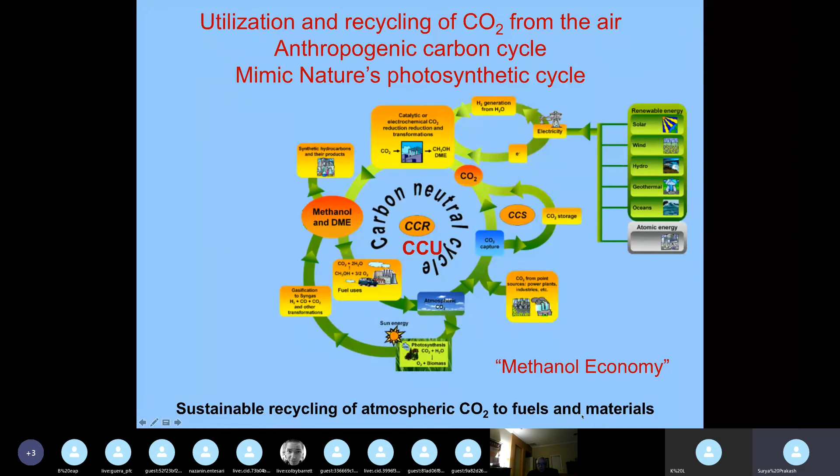It's already mentioned before. Methanol fueled cars could drive us toward an emission-less future. This was covered in IEEE Spectrum magazine in June 2018. And I was interviewed: methanol gives us a way to store not just kilowatt or megawatt hours of power, but gigawatt hours, Prakash says. It could be a game changer. So methanol is just a storage medium.

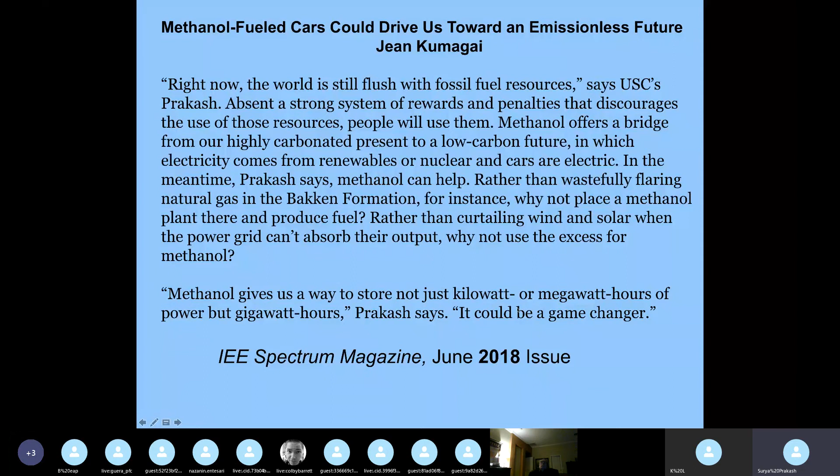And methanol not only is a fuel, it's also a feedstock to make all important products like plastics, agrochemicals, fertilizers, which we currently make from fossil fuels. If you use renewable methanol to do that, CO2 is recycled from air, you have tiger by the tail. Now, why is America not adopting? Oil companies don't like this idea, at least for the next 15, 20 years. And of course, America has a lot of fossil fuels still available.

And as Winston Churchill said, Americans will do the right thing in the end after exhausting all other alternatives. And also this famous philosopher, Arthur Schopenhauer, said, all truth passes through three stages. First, it is ridiculed. So our methanol economy is not ridiculed anymore, but there are people who are violently opposing it. Then once it's adopted, third, it's accepted as being self-evident. So we are waiting for this in the future.